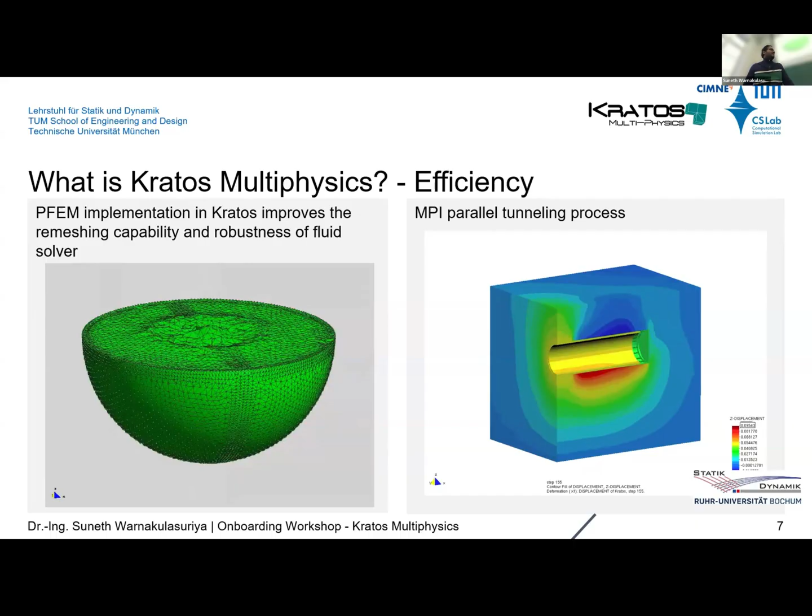When we go through, you can just ask, no problems at all. So this is about the efficiency.

Next comes the particle methods, because Kratos does not only allow FEM-based solvers, but it also allows particle methods. So you can see in the top left, in DEM, discrete element method, you have these multi-spheres, and then you have this backhoe kind of action, and then you have the material point method application here.

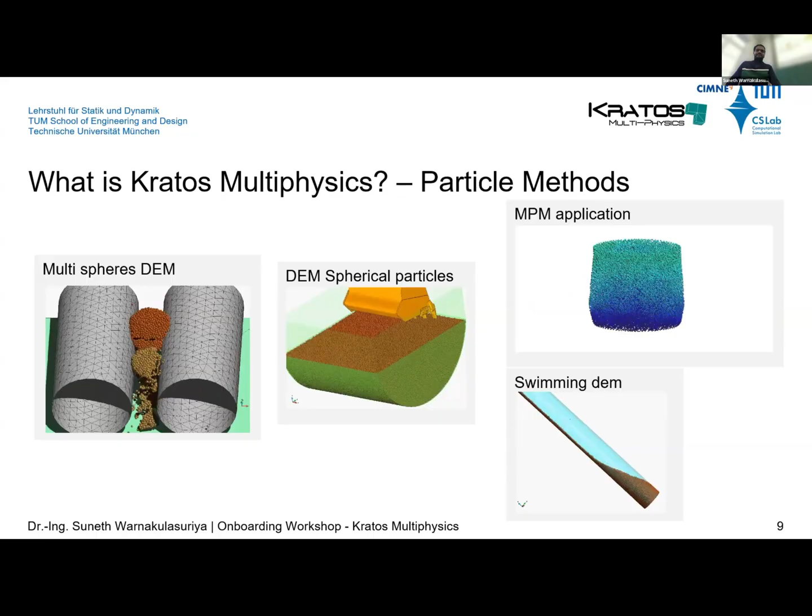Another thing which we will be looking at today is optimization. There are three types of optimization. One is sizing, the other one is shape, the third one is topology. Sizing is the easiest one compared to the other two. Shape is next hardest. Topology is the hardest, basically, because in sizing you don't change the shape. In shape optimization you can change the sizing.

What I mean by sizing is basically cross-sectional area of a beam or shell thickness. You can change them without changing the shape to optimize, for example, for weight, so that you can reduce the weight of a component and still have the same strain energy. And shape optimization means you allow the beam coordinates to move so that the beam also changes along with its thickness. That's shape. This is one of the advanced examples.

And topology means you don't even know how many beams are there. So you can introduce new beams or remove beams or elements or everything. So that's the hardest one. You can see it in the top right. Okay, the animation is not playing. Yeah. So you see after some time, it removes elements and then builds this bridge structure which has some other boundary conditions.

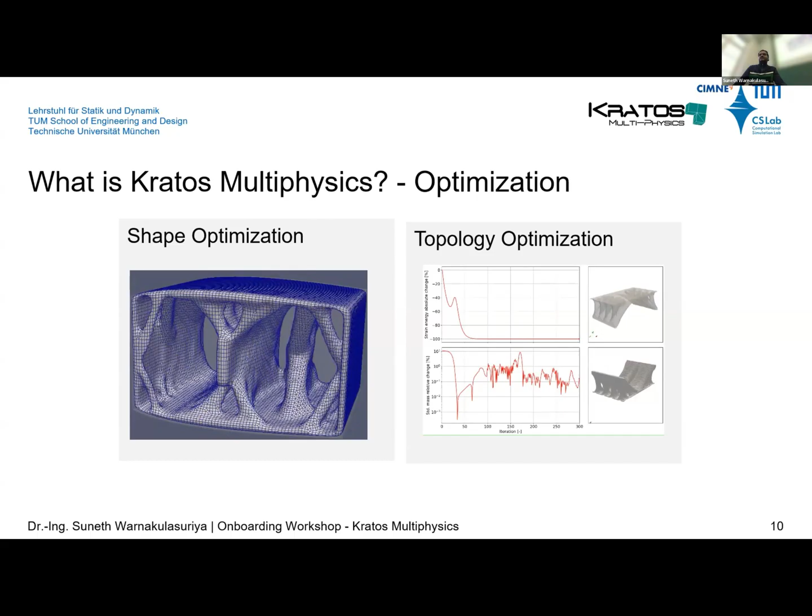Then there's topology plus shape optimization. It's a different field of study and a research area also. So this is about optimization. We will be looking at one of the Kratos examples in the hands-on session in this regard.

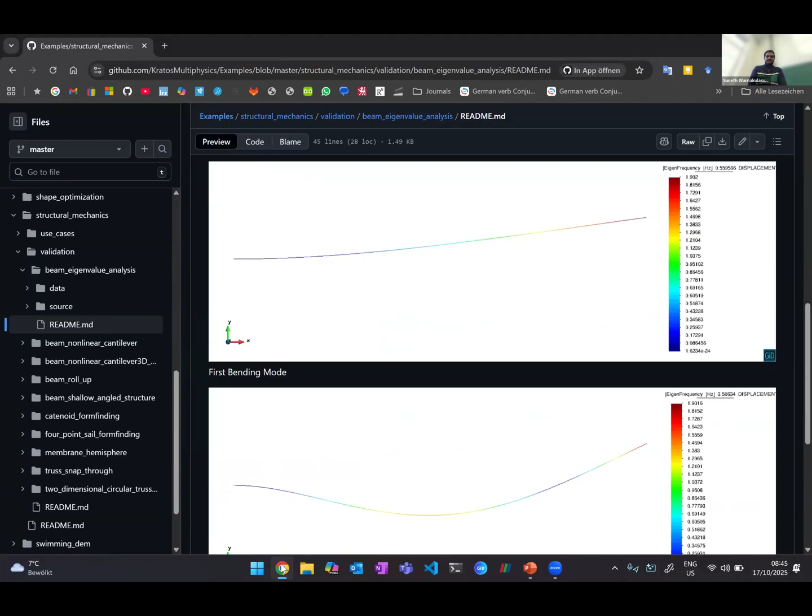So now, I just explained this. Okay, I did not go to this link actually, so I will just go there and show it also - the documentation of Kratos.

So this is, I would say, the user level documentation, which we kind of decouple from the Doxygen. That means this documentation usually has the element formulations, or whatever the formulations, but not the exact details of how it is implemented.

Because we want to decouple this exact implementation detail from the actual physics, since physics usually doesn't change - if you look at reality, it doesn't change basically how it reacts. But how we implement it might change due to our experiences, due to new features in programming and everything. So we decouple them.

So that's why we have the Doxygen, which is commented on the code itself to follow the code. This gives you a rough idea about how everything works together and what physics are being used. This is a little bit longer lasting than the Doxygen.

After this course, if you're still interested, there's a crash course also. You can follow some steps, which I'm not using today since I'm using a separate one due to time constraints. This needs a little bit more time actually to do everything, but you can just go through it. It explains step by step, which I will also cover in a different manner.

And that's how to get Kratos also, for Linux and Windows. And macOS support is coming pretty soon at the moment.

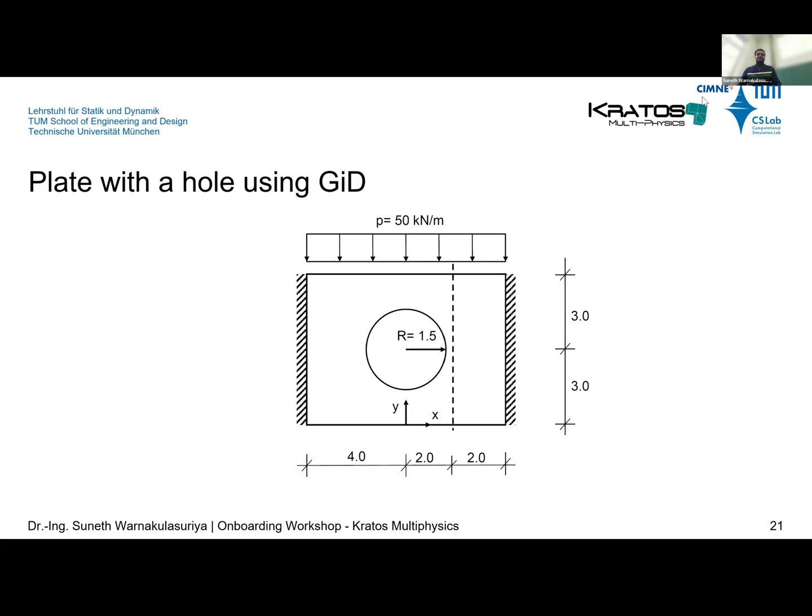Now let's go to GiD. You have some steps in the slides also if you download them. So open GiD first. The version doesn't matter; I'm not sure which version you have downloaded. For this example, it doesn't matter. But the interface might be a little bit different if you have a newer version than mine, because I did not update my GiD recently.

First thing you need to do is Problem type, Internet retrieve. If you don't see Kratos in here, and I don't think you do, right? In Data, Problem type. No? Then go to Internet retrieve. In here, find Kratos and retrieve the module. It's in Data, Problem type. Here. Got it?

And then did you find the Kratos? Yeah, then do the retrieve module. I already did it, so I cannot do it again. So it should download some things and fix some things for you. Yeah. Does everyone have this Kratos now? Once you have it, you should have this, right? Maybe for macOS, maybe there's a GiD. I never checked. Let me double check.

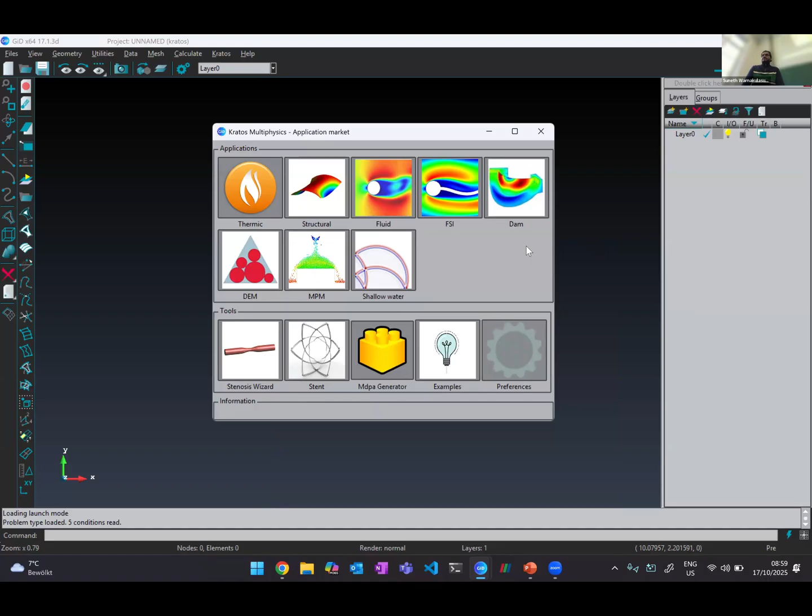Okay. Hi. Morning. So you now go to problem type Kratos. So you will get something similar, but not exactly the same unless you have the same version. Maybe there's something more, something less, depending on your version. For the plate problem, we will be using structural. So you can use structural and 2D, because this is a 2D problem which we will be solving, not a 3D one. Here. Like this.

Now you get this additional side panel, which is to configure your problem. Before configuring, we need to have a geometry first, basically. So how do you create geometries? If you look at this panel, you have here create line, create arc, create NURBS line, and this creates some basic geometries like that. This is how you can create geometries, even the 3D ones, in GiD. How you create these geometries is different in every application. So you will see it when I do the Salome example also.

So since it's a plate, let me go to the plate. We have here 8, let's take meters, and 6 meters here. So everything in meters, even though it's a big plate then, who cares? So you can create here basically a rectangle by clicking on this. All of these steps are in the slides also, but you can just follow me on the screen if it's easier. And if I'm going faster, just let me know.

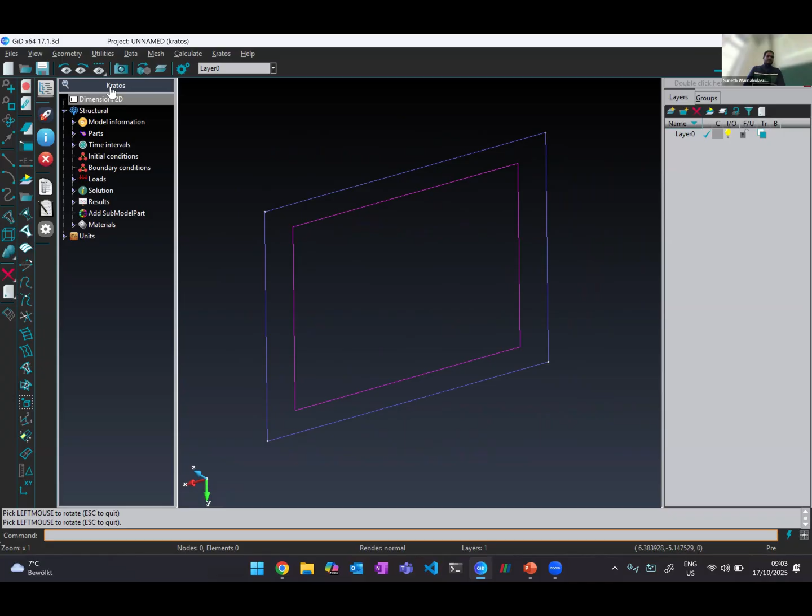And then I think you can rotate or translate by shift and right click like this in GID, and then rotation is left click. But you need to press the shift, like this. You can always get back to the normal thing, like view XY original plane in here. So click on here, XY plane. So you get to the normal.

In GID, the points are in white. Lines are, I don't know, this color is blue or what? I think it's blue. This color. And then the surfaces are shown in this purple. Purple says it's a surface. And bright blue, the volumes. But we will not be doing volumes in this one, so we will not see. So that's how you differentiate the lines, points, and surfaces in GID.

But if you want to see the full flat view, you can click on here, render flat. So you see it's just flat, the actual outer appearance. The problem with outer appearance is, if you have a complicated shape, configuring a boundary condition is hard. So that's why we don't use this unless we want to find some problems in the mesh and all those things. So you can change it, render smooth, and then again back to render normal. Usually we use render normal. Yeah.

Now we want to create a circle in the middle point. So you can go here again, and here the circle.

It doesn't pop the, yeah, circle. And here enter the center for the circle. Here it says. So you can say here 0, 0 because my center is that. And what is the normal direction of the circle? So for this case, it's positive, is it? Like this. So then, yeah, it's there. So you can click on it.

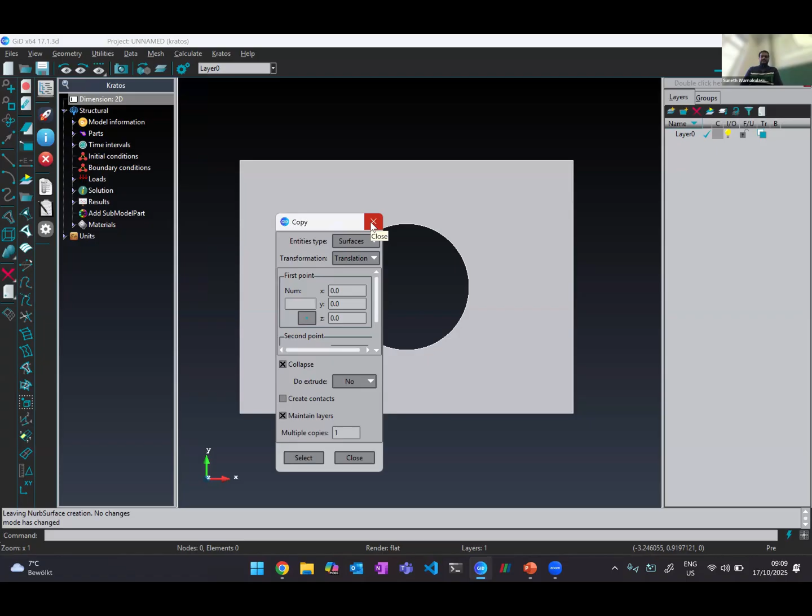If you want to have a 3D one of it, basically, it's not so intuitive. What you can do is utilities, copy. I mean, not for this one, I'm just showing it, because this is a 2D one. You can do here, surfaces, extrude, mirror, everything is there, if you want to get 3D ones from this. For this one, we don't need it because it's 2D. So it's okay. Yes.

Now we need to identify some domains, basically, to set, let's say, boundary conditions. Another small question. So everyone has some background in numerical methods, right? Yeah, so I don't have to explain that much. In this example, we know left and right are fixed, and we have a distributed load at the top, right? So what we need is to have these boundaries separately so that we can apply different things to them in the future.

How do you do that? If you don't have the right panel, you have to click on this. So it pops up the right panel. The layers and groups, the button in here.

Then go to groups, because layers are used to do the advanced modeling, so you can turn off and on some things and then use the visualization within layers with different colors, to do advanced modeling of a little bit complicated components. The groups are used for the simulation purpose, to specify some areas to apply maybe some boundary conditions, or maybe some material properties, whatever you have to apply differently.

Let's say that you have this plate half divided with two materials, then you need to divide first your mesh, the geometry, to represent that, and then you need to have multiple groups. So let's see how the groups are done. Right click on it, new group. Then I will just call it solid because this is a solid plate. You can just give any name.

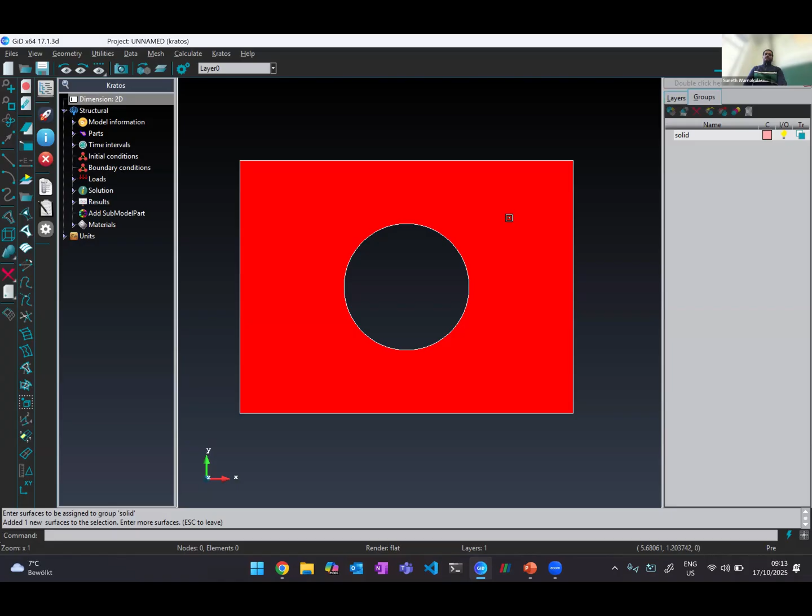So it's selected. If you are in the render view, the lines view, which is not the flat view, then you need to click on the purple lines, which represent surfaces. If you are in the flat view, you can select anywhere in the surface. Now it says added one new surface. You can keep on adding multiple surfaces to this group if you like, or press escape because we only have one surface. It says here assign one figures to group solid.

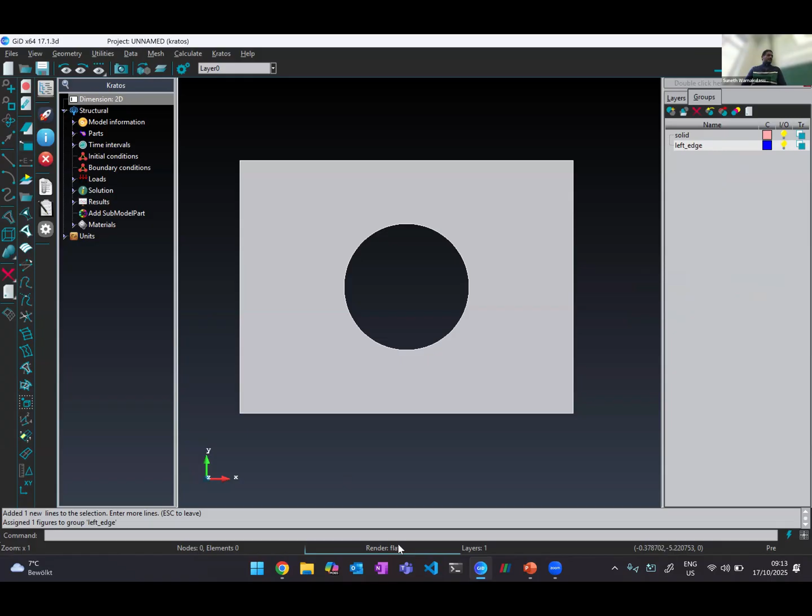Then you need the boundary conditions. Again, a new group. I would say left edge. So you can right click, again assign. Now it's a line, not a surface anymore. You can say line here and click on this line. So added one new lines. Press escape, done. Now I will move to the other mode just to see the other one. Now you need to do the same for the right edge. Assign line, so you can click on this one. That, and then the load.

Like this. So for this example, it's not that crucial to check whether what you have done is correct. But for complicated ones, it might be. Because you may never know that you have clicked on the correct line, because you might have visualization problems when you're clicking, and you might have clicked the wrong one. Because if you run with the wrong boundary condition, you will still get some result, and you will be scratching your head why it is like that. So it's better to always check your steps.

How do you check that? You can use this light bulb to turn on and off. That's what I usually do. So when I turn off the solid, you see the surface goes away. Okay, that's the only surface then, which I selected for the solid group. You can turn on and off. So you turn off that. Then you turn off the left edge, you see the left edge goes away. So I have selected correctly. I have not missed anything. That's what I'm checking now.

And the right edge, correct. Load, correct. I don't care about others. In this problem, we don't have any boundary conditions for them. So that's how you check. And the other thing you can check is you can right click and list group entities and then see how many surfaces are there also. It shows how many surfaces. Only one surface. And the left edge, also the same. You can double check that.

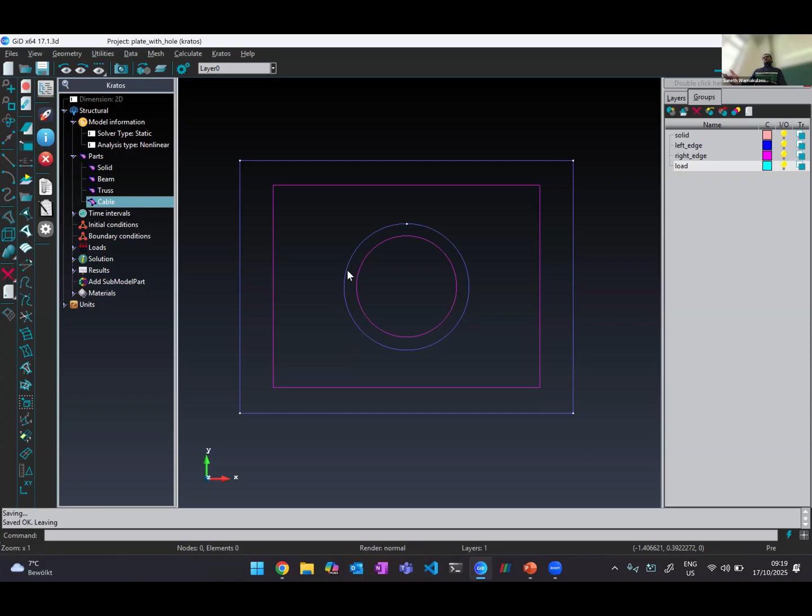We are always working with notepads to create the JSON files, which I will show you later. That's how we are working, not with clicking and stuff. We only click to create these geometries in our practical day-to-day life, because otherwise it's hard. But for creating these files, we don't use interfaces usually.

Yeah. So this is a solid one. So you can double click like this to create a new solid. So small displacement is fine for us. A linear elastic plane strain is fine for us. So these are the strain types and these are the element types. Again, not the whole spectrum of elements in Kratos. Kratos has a lot more elements than this, but only the interface supports this. The GID only supports this.

And then these are the properties. You can keep them as they are. It's not a problem. And then you need to select which group. So we said solid. So we put solid and press OK. And again save. Every step, just save. It's a good practice in GID.

We don't have any beams or trusses, but you can have multiple types of elements here connected to each other. Like in a steel bridge, you can model it with beams and the bottom with shells. All of these things are possible, but to keep it simple, I didn't plan on doing that in this onboarding workshop.

Next, the time intervals are for transient simulations. For static cases, we don't care what the time interval is. We just use one time step. Initial conditions are again important for transient simulations. For static ones, we don't care. It's good to have a close enough solution, then it will be faster if your problem is fully nonlinear. For this super simple static case, we don't care about it.

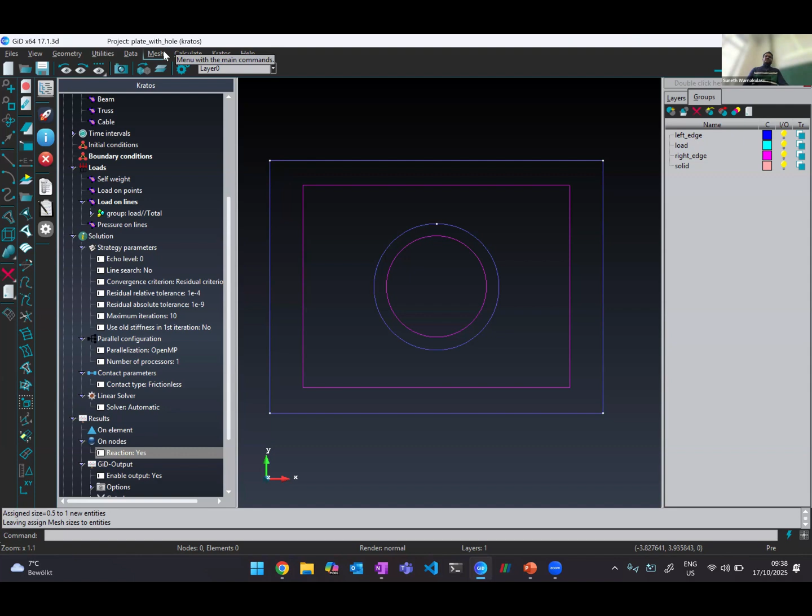Once you have the meshing sizing done, you want to check whether you've done it correctly. Go to Mesh, Draw, Sizes, and All Types. So you see the sizes you've given: mesh size 0.5 for this geometry, 0.3 for this circle, 0.2 for the lines.

Save, don't forget that. You can also check your mesh quality once you've generated the mesh, I'll show you how. First, let's generate. I don't know how much you know about boundary layers, but for fluid guys the boundary layer is important because that's where all the velocity changes happen, so you can create boundary layer meshes too if you like.

You also have the element type here. You can specify triangle or quadrilateral. Since we use unstructured meshing, everything will be triangle, so there's no point specifying quadrilateral. There are mesh criterions too, those are advanced stuff for how you do the meshing.

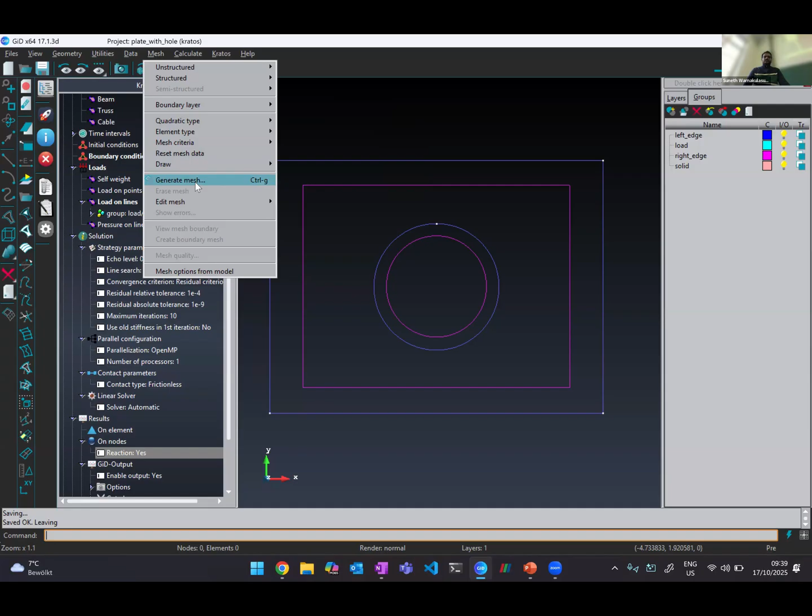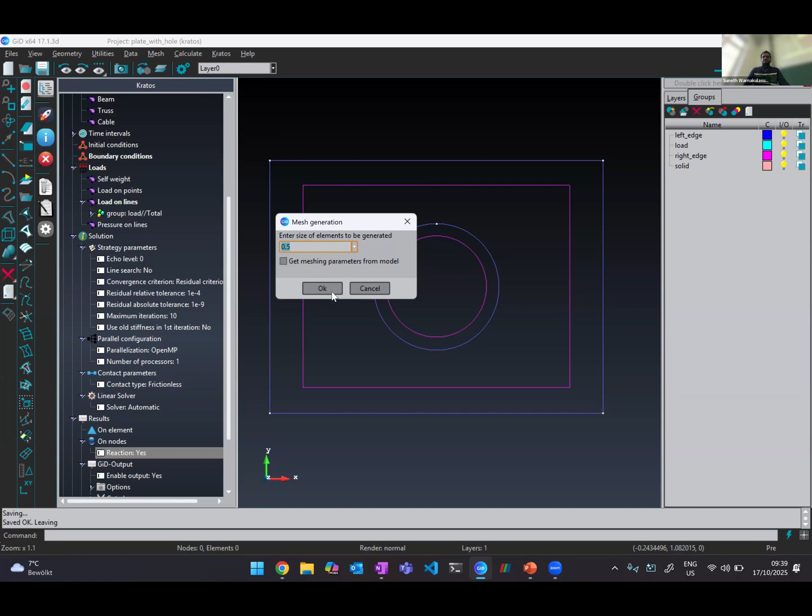Once you've selected and done the sizing correctly, click generate mesh. This is the general size the meshing algorithm will use if you haven't specified any size for some domains. It's optional - if you've specified every size correctly, this is only a fallback. You can say 0.5, and it will generate the mesh.

So it says linear elements, meaning the edge elements, is 100, and you have triangle elements, which are the surface elements, 784, with 480 nodes. There's also memory consumption shown - it's a super simple mesh so it's fine. You can say view mesh to see it. It's not the best mesh, but we can work with that. Now save.

Now, how do you check the mesh quality? That's also important when you come to numerics, because if you have a bad mesh you might get an answer that doesn't reflect true reality. It's always assumptions, because when we do numerics we make a lot of assumptions, so you need to always check your assumptions.

So you go to Mesh and then Check Mesh Quality. For linear elements, you can check different quality criteria - element volume is the only one available for linear elements. You see the volume is 0.2 everywhere, so it's nice, the same size every element, even though it's shown as a cumulative graph. You can switch between cumulative or normal view. Everything is 0.2, so it's fine.

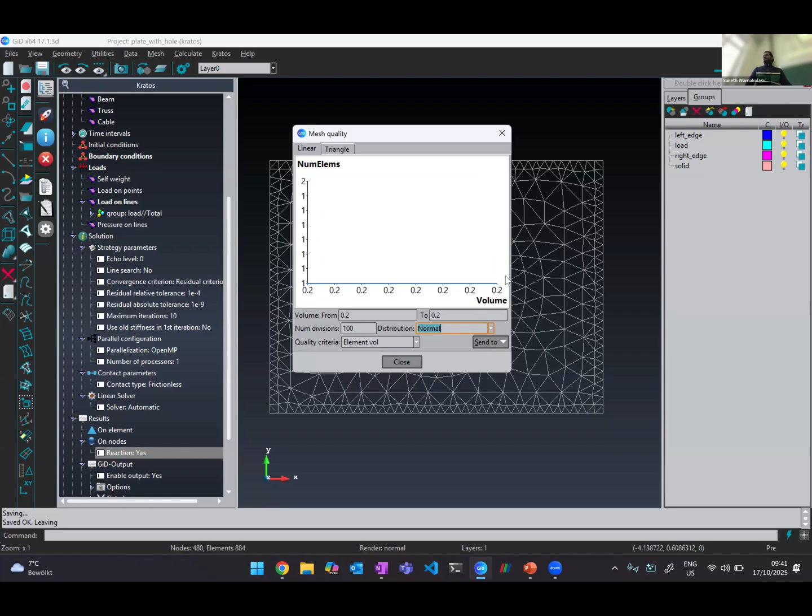Then let's look at triangles. Triangles aren't the same case as I told you, they can't have the same size measures. You see here the volume is 0.19, but the problem with triangles is I don't like using volume that much. I usually use either the Jacobian, the shape quality, or the minimum or maximum angle, because it makes more sense.

What minimum angle means is, in a triangle, what is the minimum angle you get in every element. If you have a perfect triangle where every angle is 60 degrees, that's perfect and your mesh will not have any troubles at all. But in reality you will never have that. So you see here 28.4 is the minimum angle, and the maximum is 59.3 - almost 60.

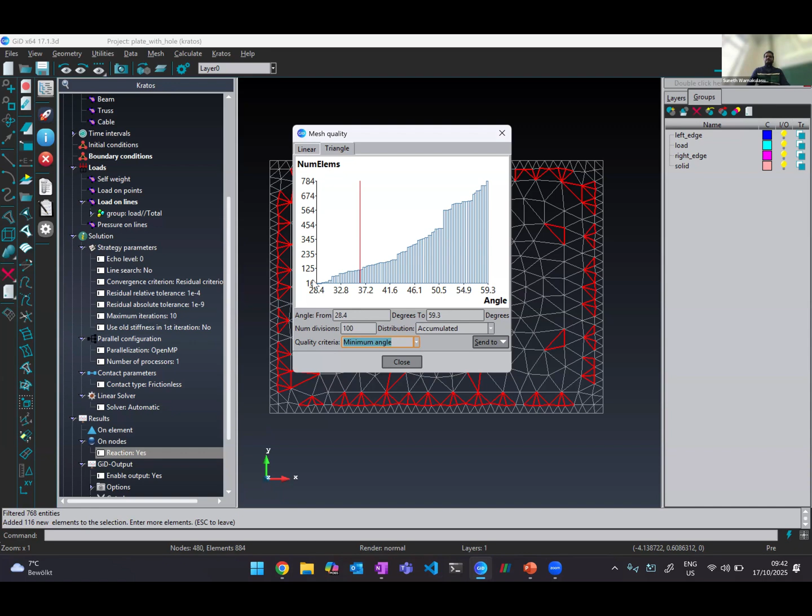So there are some elements at around 30 degrees, but that's not a problem because it's not skewed. If you want to see problematic elements, like say 1 degree, that might be a problem. You can double click on it and it will show all the elements which have a value below that threshold - these are the elements for mesh quality control.

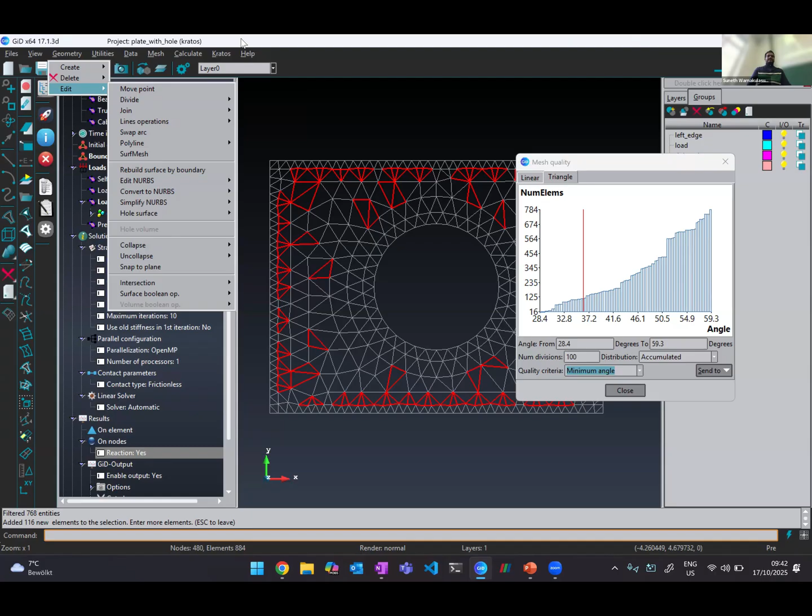Then you can edit those elements manually using Geometry Edit, and move those nodes or break them into multiple elements. That's a bit advanced, but you can try it if you like. Divide and join options are there for this, but it's a bit advanced. That's how you can do it. If you want to keep these elements for future reference, you can send them to a new layer.

Like this, that's why the new layers are used. You can say new layer, and if you go to layers, you have here the layer which has the elements you selected. Now you can work on them separately. Layers are used for this purpose, just to work on some sub parts, turning off the others. It's not used by the simulation, only for the geometric modeling and mesh handling.

Like that. Don't forget to save. I am repeating this because it's super important, the saving part with GID. Now we have created the mesh.

You can try run or calculate. I don't think it will run for you. Let's try it, in my case it will run. If you say calculate, okay.

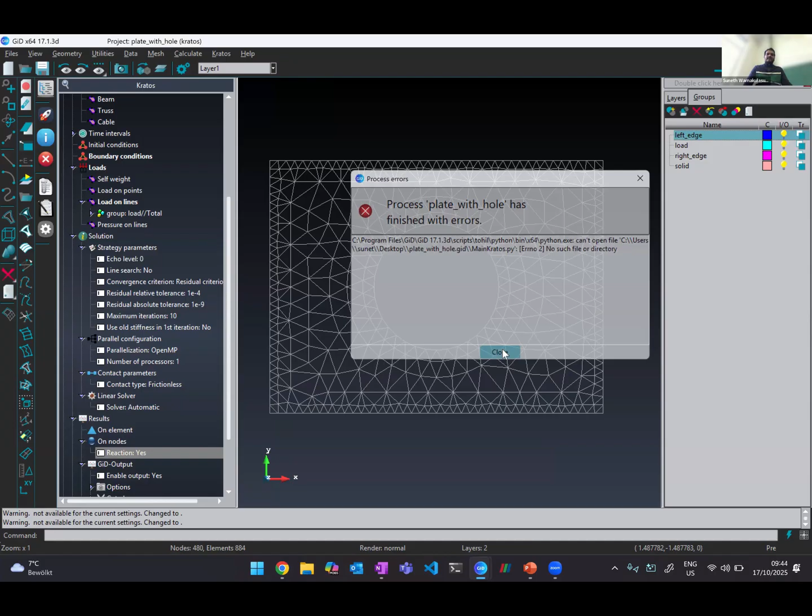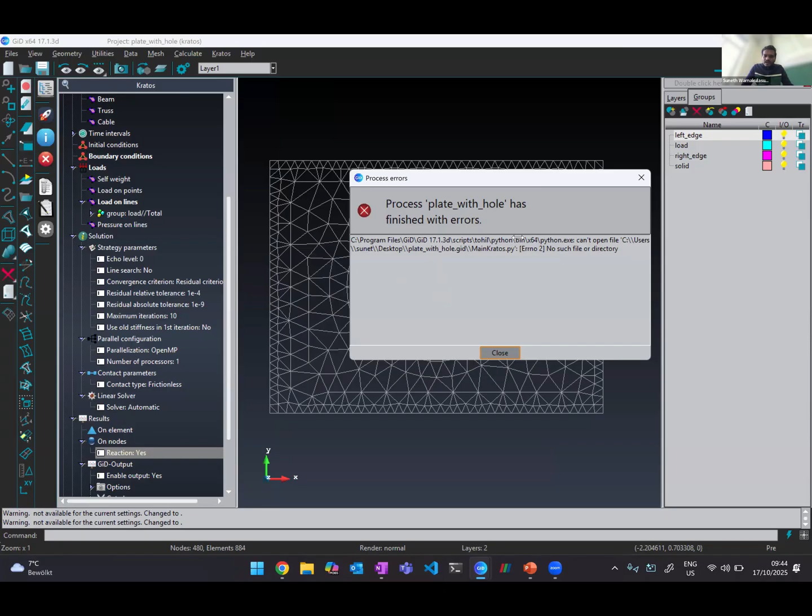Okay, I didn't save it. Okay wait, Kratos mesh, yeah. What is this? Okay, it says my file directory is wrong. Let me double check.

The best way, which I would always say, is write calculation files, no run. Do that, it's easier, because we anyway need Python separately to do the rest of the course. I usually don't run it in GID for different reasons. So you can say write calculation files, no run. Oh yeah, that's a problem in GID.

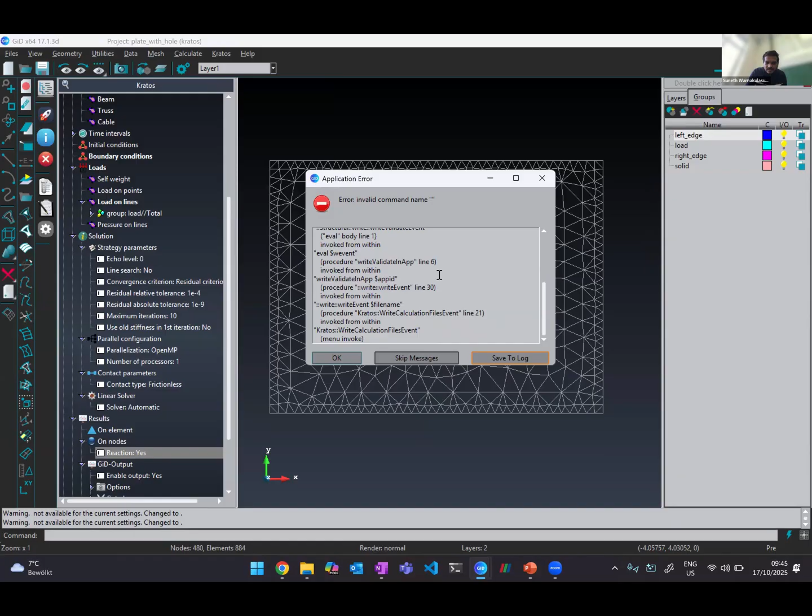Were you able to do this? Yeah, my one is broken, I think. That's why I told you GID is a little bit delicate. My one is a little bit broken. It was working yesterday night.

Yeah, give me a second, I will just do everything new. Because sometimes when you have in-between errors, GID kind of breaks and no one knows why. So I will just do it easy, super fast. This is settled, right? Yeah.

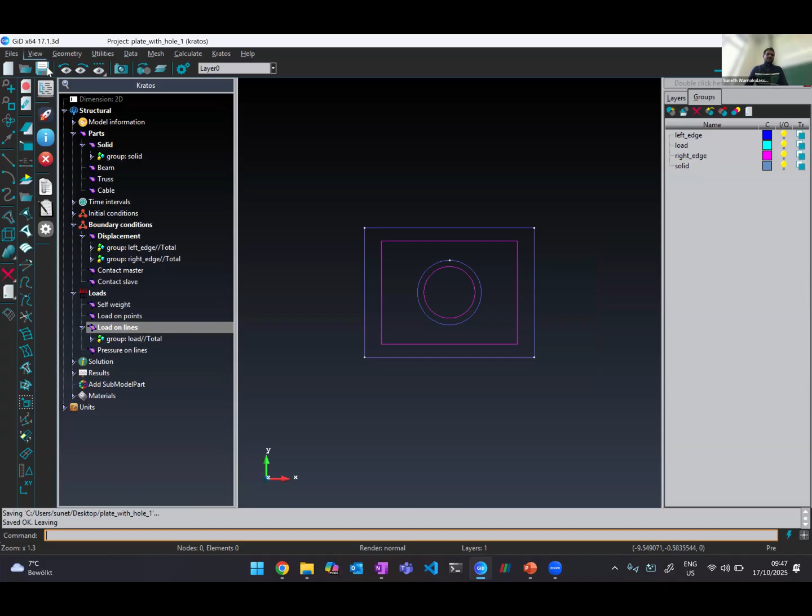Yeah, I didn't give any sizing, so it's like this. Okay, it works now, that's what I told you. It works now, so when you have some intermediate errors in GID, this can happen.

That's why we always save and reload, so that you can reload at an earlier point. Another point is the undo is a little bit not reliable, even though there's somewhere an undo, don't rely on it. Always save different steps in different file names and then use manual undo.

Yeah, now it worked for me also, and I think now I can call calculate also. It works. Earlier I had some intermediate errors, so that's why it was not working. So you can say you're finished, but I don't think you can do it. Can you try it? I think you need to install Python. Does it work for you, the calculate? No, right? Yeah, so let's go to that now.

Fix that. So open command prompt like this, because this is anyway required for the rest of the course also. First check your Python version, you can say python --version. So does anyone have something above 3.12 Python version?

That might be a problem. No, right? And below 3.8 is also not there, right? Because Kratos is only available for Python 3.8 to 3.12 at the moment.

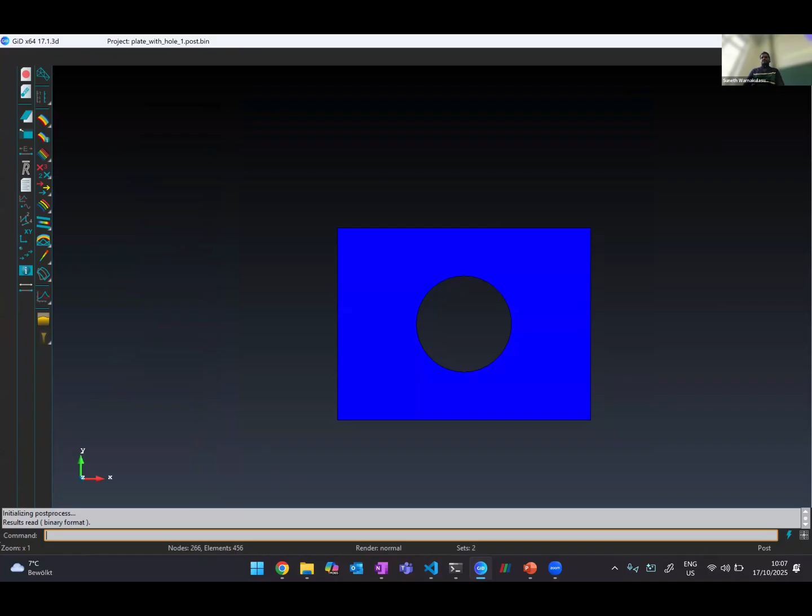Now let's look at the result. In GID, if you want to look at the result, you can click on this. Since we ran the simulation, it should be fine. Here it says pre and post processing, click on this, let's hope it works. Yeah it works, so its interface fully changes.

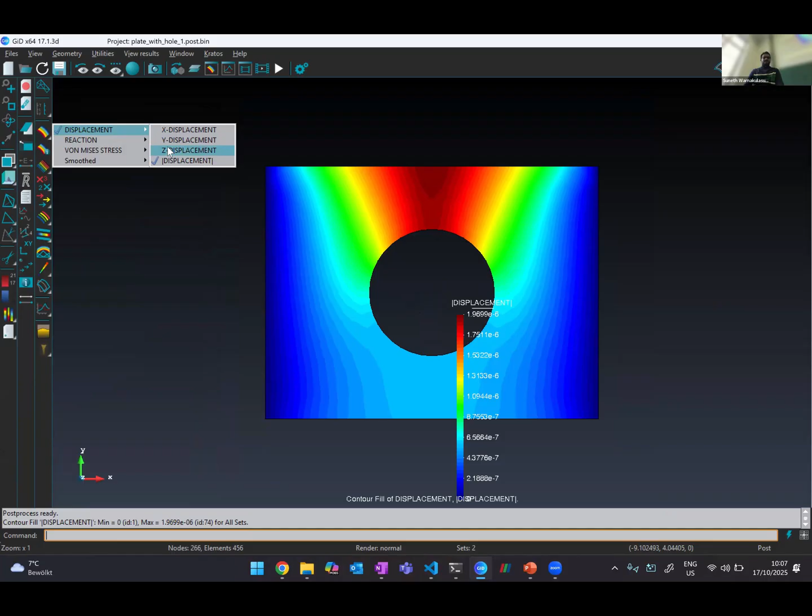So you can just zoom in like this, and then you can see visualize stuff. So in the displacements, you can see the displacements like this, or if you want to see the components of it, you can see X, Y, Z, however you want. And if you want to see von Mises stresses, this is the one. Those are Gauss point values, so that's why it's discrete per element.

And if you want to see reactions, you see the reactions are higher in these 2 edges, that makes sense. The rest should be almost 0. Yeah, that's how you can visualize. There are some additional filters and mechanisms, so you can just check them out.

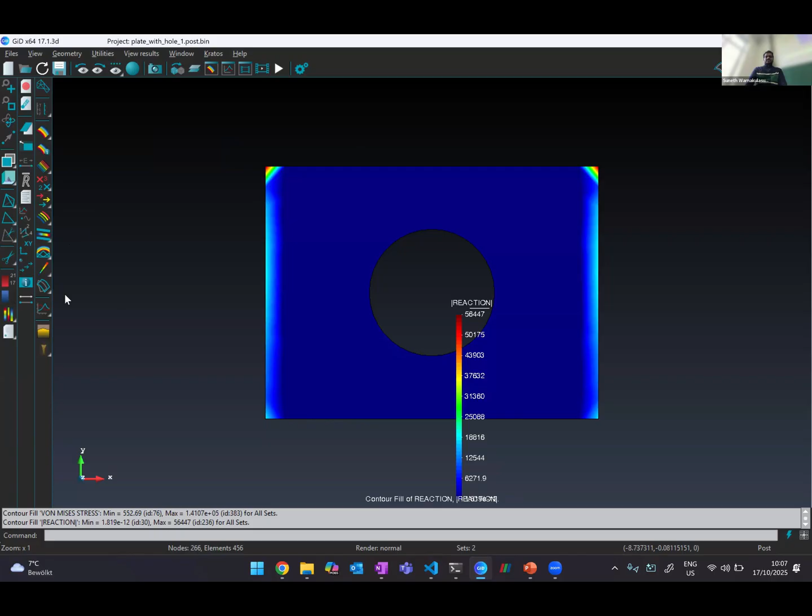If you want to see the deformation, you can go here, deformation, and then click on displacement. So you see how the structure deformed with your load. And there's this multiplication factor for sure, because actually it doesn't deform that much. This is artificial, I mean magnified deformation.

Yeah. With this, I think I'm concluding the GID part. I don't think I missed anything. Let me double check. And then we can take a break of 15 minutes, I think, right? I don't know when the break is, to be honest. It's 10:07. I'm a little bit late, but it's fine. We can take a break of 15 minutes. Then if you have any questions you can ask me anything regarding up to now.

Yes. Hi. I'm not sure, I'm not able to view the... Okay, first of all, we need to open the Python file. You need to go to the software, onboarding, and then go to script, and then click Python. Okay, I will install it. No, I think you don't have the extensions installed, which I will show you now. I can install it for you.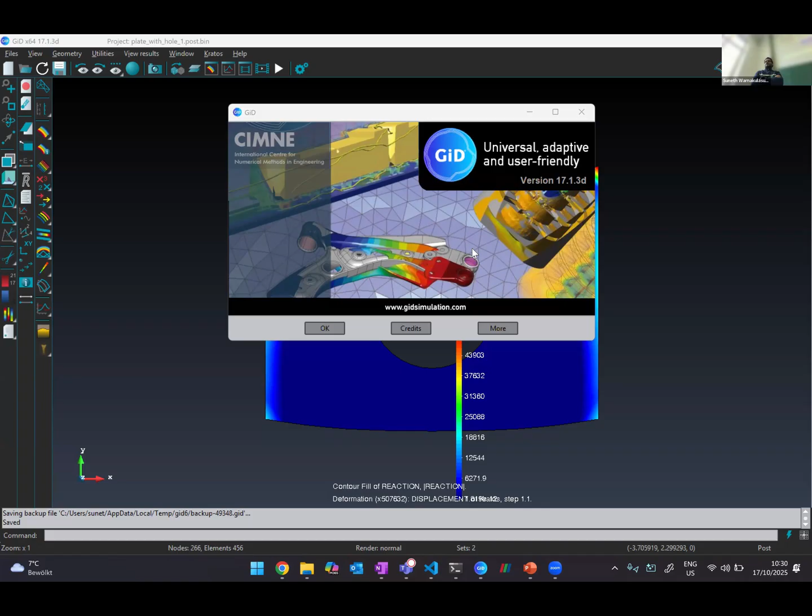Okay, since everyone is back, I think we can start. So now the GID session is over. Now let's look at the fully open source pipeline version, which is Salome. I hope everyone has Salome installed. So I will close GID now. Okay, I will save everything and close. I hope this is still being recorded. Yeah.

Was this mesh done by GID or also from the Kratos software? No, this mesh is purely done by GID. Kratos has its own meshers, as you saw in some cases. We are not going to touch that at the moment, but I will explain some of the structure in the afternoon session because the afternoon session is fully in-depth Kratos.

The morning session I kept just for clicking and running, so that you are not getting overwhelmed in the morning, so that you're not running away basically. The afternoon is fully in-depth Kratos, fully hands-on without clicking and running, basically.

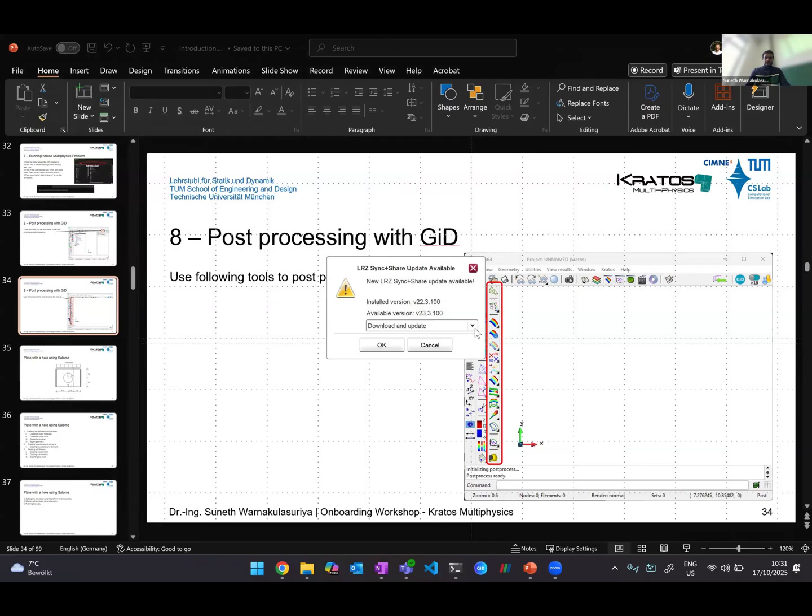Okay, so we can close this for a second. I don't need this. It's the same problem, just to see the differences, hardships, everything basically, because when you get something easier, you have to pay some price. It's always like that.

Now let's look at Salome. So you have some instructions in the slides. I'm not showing them because I'm going to do it live with you, so you can follow me. But for the future, you can refer to them if you forget some steps. That's why I put them in the slides with screenshots, how to select and everything, but I will do it with you now.

First things first, everyone has Salome installed, right? Let's open Salome then. I have 9.14, but I checked yesterday night, there's 9.15. I don't think it should be a problem, 9.14 or 9.15. So this is Salome. Okay, give me a second.

I think I can magnify these things because Salome in Windows has too small icons for presentations. Let me try to size it. How do you change the text size? I will try, I don't know whether it will work. Let's see whether it helps. It doesn't help. I don't know how to zoom. Does anyone know in Windows how to zoom? Display settings. The magnifier. That will be hard, then the navigation is a little bit hard. Display settings, there is a scale. Let me try. Brightness. I don't see it. Here, scale.

Is it better than the white one or the dark one, or same? Yeah. Okay, then let's not waste time on these colors. Yeah, when you go to Shaper, you get a lot of options, even though they are super small. Sorry about that. I don't know how it looks like in your computers. My computer is like this. Yeah, and Linux also the same basically.

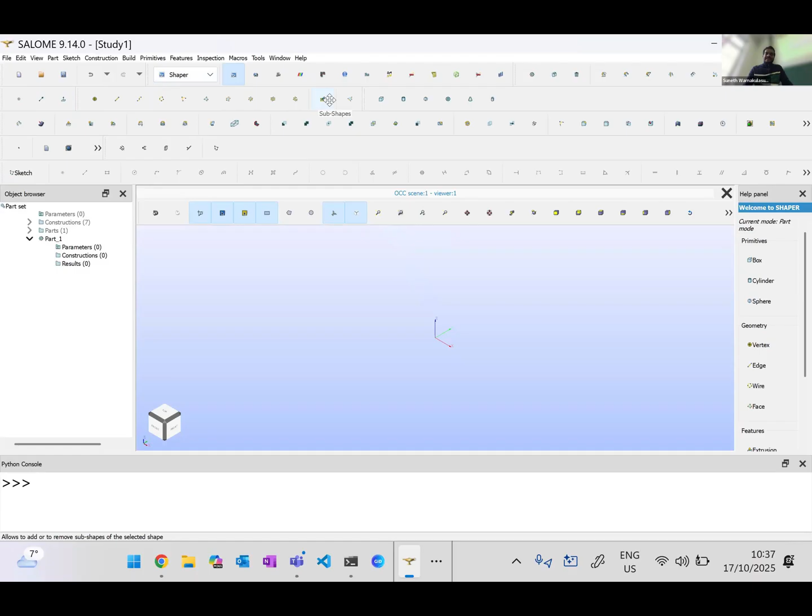Okay, I get a chat. Okay. I am not sure how to do that. Yeah. Yeah, if you have any suggestions, just ping me actually, so then I can change it, because I don't know how to change the icon size in Salome. I tried it, but didn't work.

Sorry about that. Yeah. So in the Shaper, first thing is, so you have here this object browser in Salome, which is kind of like the parametric modeler. Salome can be used to do parametric modeling. Even the mesh can be parametric. One nice thing about Salome is, if you want to do advanced parametric studies, whatever you do in Salome can be recorded as a Python script, and then you can run this Python script multiple times with different parameters.

That's the best thing in Salome. Because backend, it generates also Python script, basically. We don't see it, but if you look at the source code, there's a lot of Python scripting in Salome also. Yeah, so this is the object browser. So it has a lot of things. First thing is we need to create a sketch. That's how we started in GID. We created a 2D sketch, and then afterwards only we did the stuff.

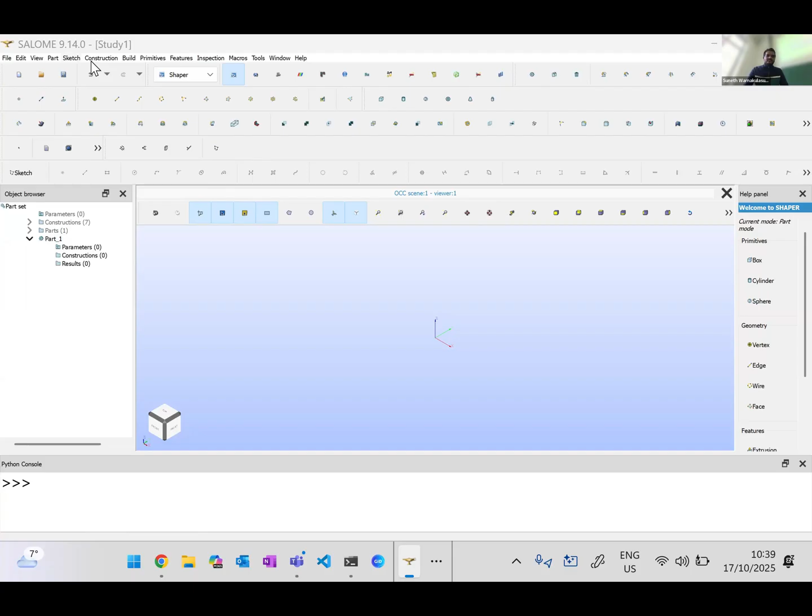So how do you create a sketch? There should be a button, even I can see it. Or you can go to sketch menu, because there's a button for sketch. But if you can't find it, go to the menu. Sketch. So it's visible there. So that's for sure a shortcut. I cannot see it now with this zoomed version, because all my usual positions of the icons are now different because of the sizing. Zooming. Yeah. Create a sketch. In the sketch, they ask for a plane.

Since this is an initial sketch, they will only show you 3 planes. But when you create more complicated geometries, you can use the surface of another component as a sketch plane also, like that. So initial one, they will only show you these 3. You can create custom planes also if you like in here. Another point in here is selecting a plane is a little bit important if you want to do 2D or 3D. Let's assume that you want to do a shell analysis in Kratos.

In that case, as I told you, shell elements are always 3D. But if you do a shell which is just on a single plane, that means you just need XY, right? Basically. But the problem with Salome is if you do on XY plane only, and all the components are only in XY plane, not even extruded to 3D, when you generate the geometry file, Salome interprets them as 2D, then writes them as 2D geometries everywhere. Then when you read it in Kratos, shells are 3D. Kratos says, hey, you have given me 2D geometries. I cannot work with that.

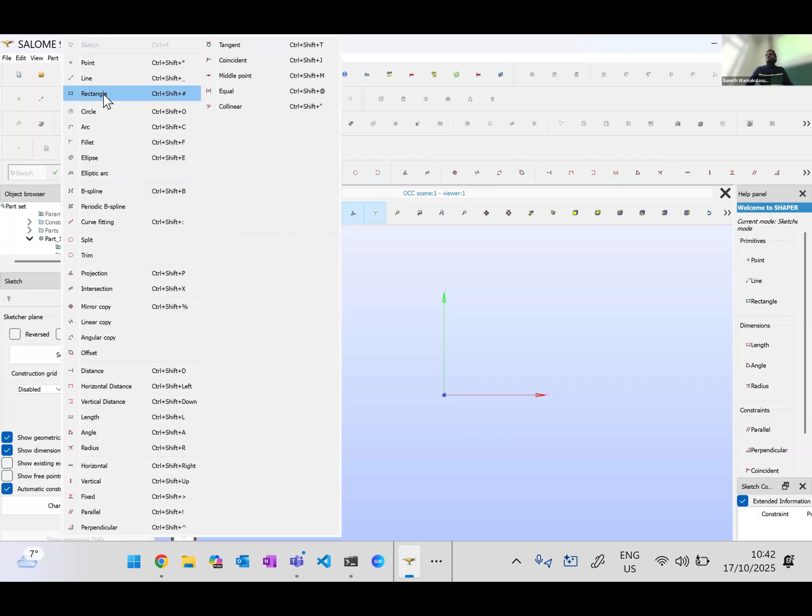For the descriptiveness, I will use the menu always, not the shortcut buttons, so that you don't have to struggle with the icons. So let's create a rectangle, because that's our first thing. Now you get two options in here. You can either give corners or center point and a corner. For different geometries, they have a lot of other options also. So I like this one. I select this. Then you can just click and click. Random, no worries.

You see here, some relationships are already there. If you zoom in here, you see a perpendicular sign, because Salome is parametric and it can have relationships with geometry. So here it says this line is perpendicular to this line. That's why this symbol is there. If you click on it you can delete it also, then it's not perpendicular anymore. You can have an arbitrary shape there.

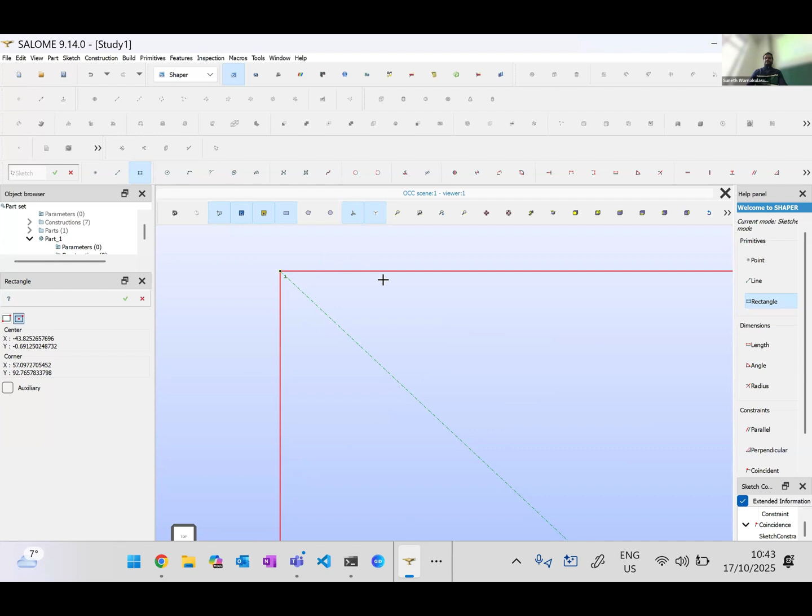Now what we need is to give the sizing. For sizing, you will see here some sizing options. Or you can go to sketch and say either horizontal distance or the length. Click on it and click on a line. It asks for the length. No coordinates information, because this is parametric modeling. You can still do it with coordinates, I will show you later. So this is 8, so it becomes 8.

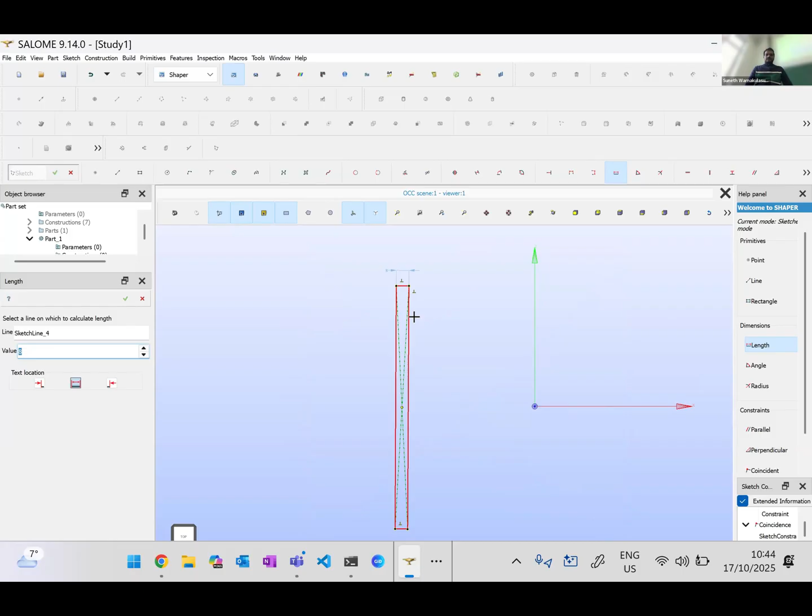Then this is 6, so I'll click and put a 6 there. You see, it's kind of rotated now. That's because the constraints are not enough to fully define your geometry. It's underdefined. You need more constraints. Another constraint you can put: go to sketch, say vertical, and select one of these lines. Or horizontal to the other one, because it's perpendicular.

If you over constrain, it will throw a warning saying it's over constrained. You can try. If I put this one vertical and then try this one vertical, it's over constrained. It didn't apply. It throws a warning basically, not an error, if you over constrain your system.

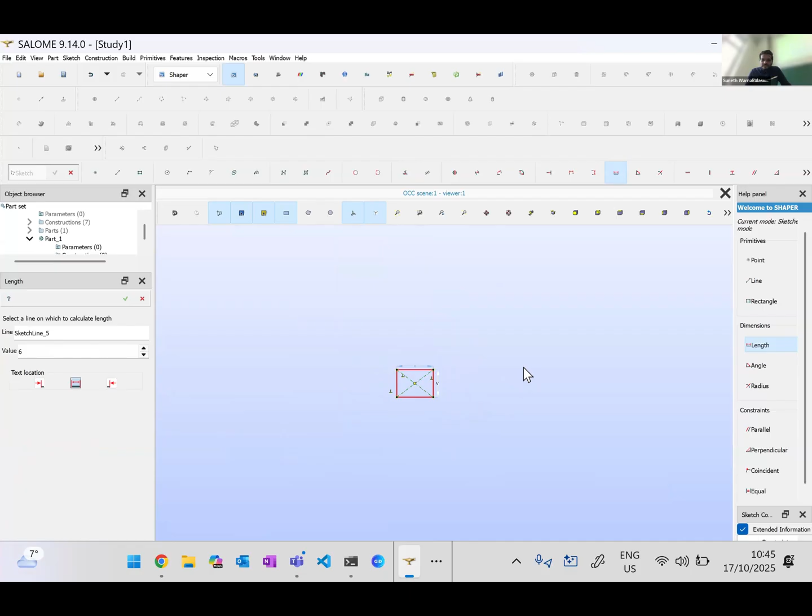Now still a problem. This can still be moved everywhere, that's why it's still not constrained. You can move it anywhere, but you cannot rotate or size it anymore. To make it fully constrained, you can say this midpoint coincides with the origin. How do you do that? Go to sketch. There should be coincident. Click on it and click on the origin. You see first object, second object. First object is the origin. Second object is the midpoint, or you can do an endpoint also. I'll just do the midpoint.

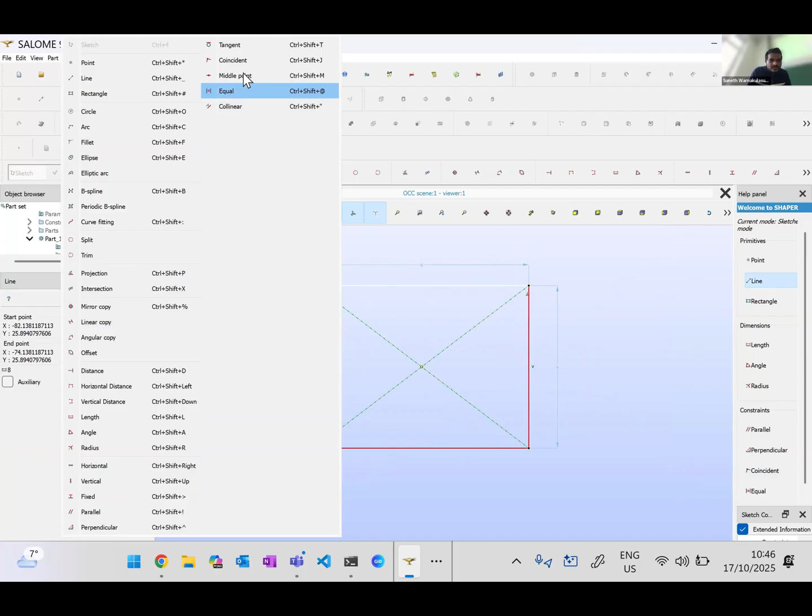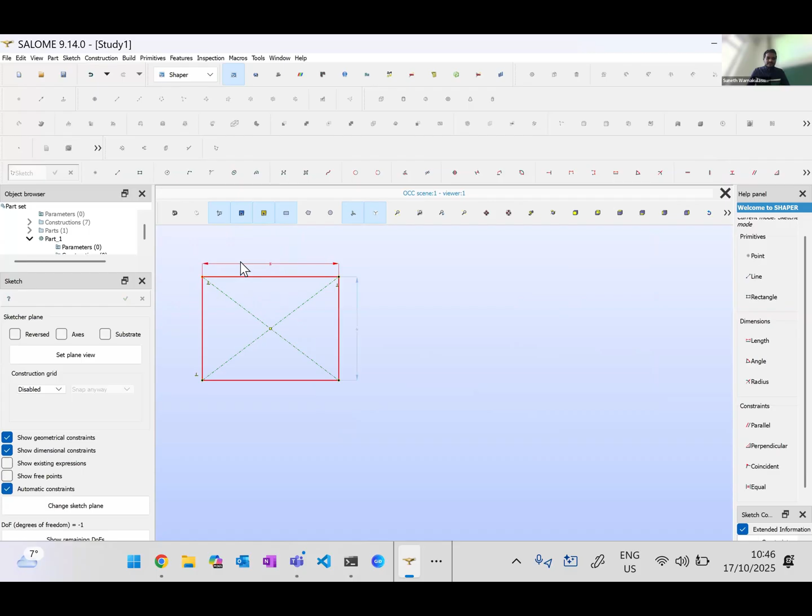It didn't select actually. I think I didn't get it. Coincident. It's the origin now. If it doesn't apply, that means you have some conflicting constraint.

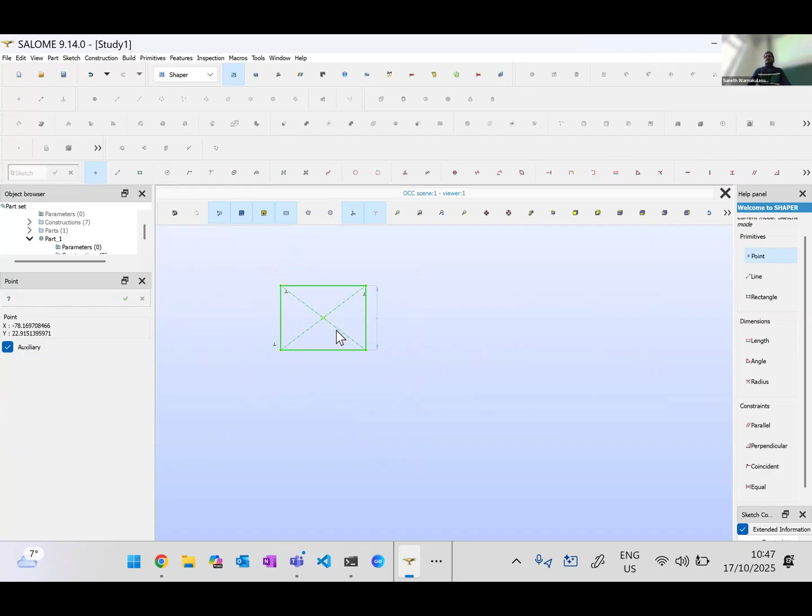You see here, if it's fully green, that means it's fully constrained. It was red because I over constrained it somehow. I think I clicked on some other point and it got over constrained. We can just make a new one. It's easy. Shaper, sketch, and then this is a rectangle.

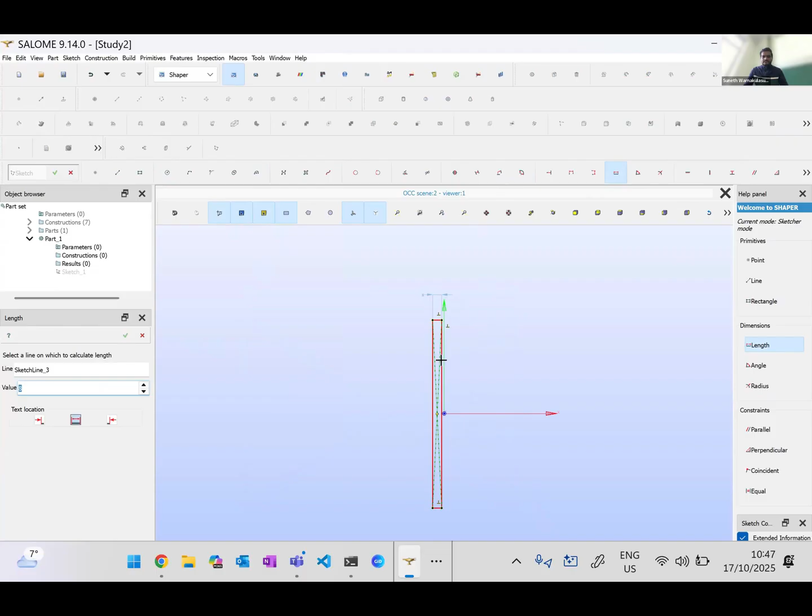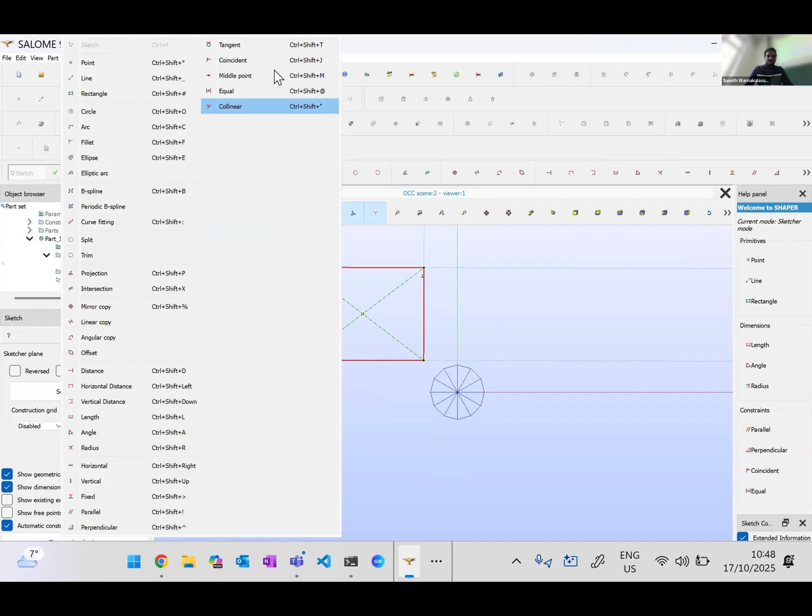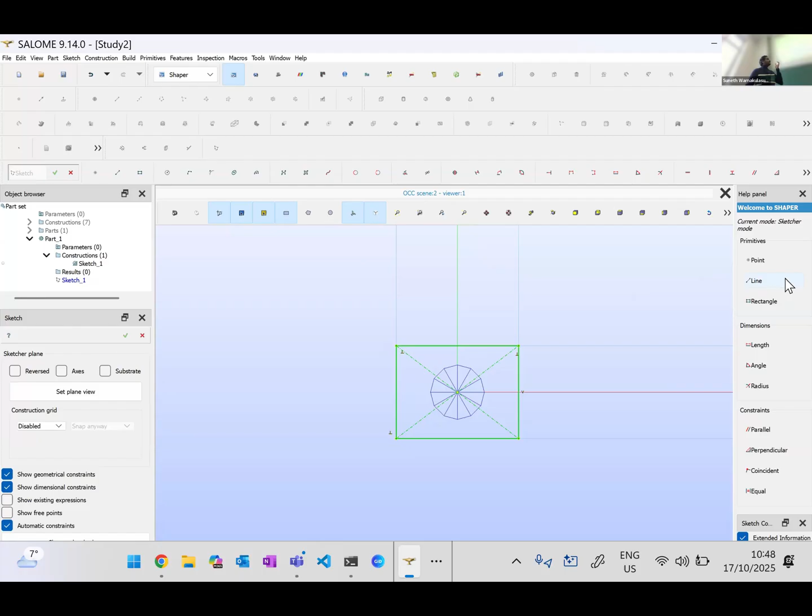Now I need the vertical one. Vertical constraint. Now you see it's fully constrained. Green means you don't have any variables which are not defined for this geometry. Green is fully constrained, so you can't move it anywhere.

Now we need to create a circle. That's the circle, or you can go to sketch and circle. Select the midpoint and draw it like this. First draw with no dimensions. Afterwards, go again to sketch and radius. There should be radius somewhere. Here.

Radius. Click on the circle. And then the radius is basically, I think, 1.5. So it's fully constrained, because we fixed it at the center point and the radius. So the circle is fully defined now.

Okay, let's save. No, we cannot save. You need to go out to save. If you want to save now, click tick and then get out of the sketch by green ticking it. So you go out of the sketch. Now you are not in the sketch mode. You cannot change the sketch anymore.

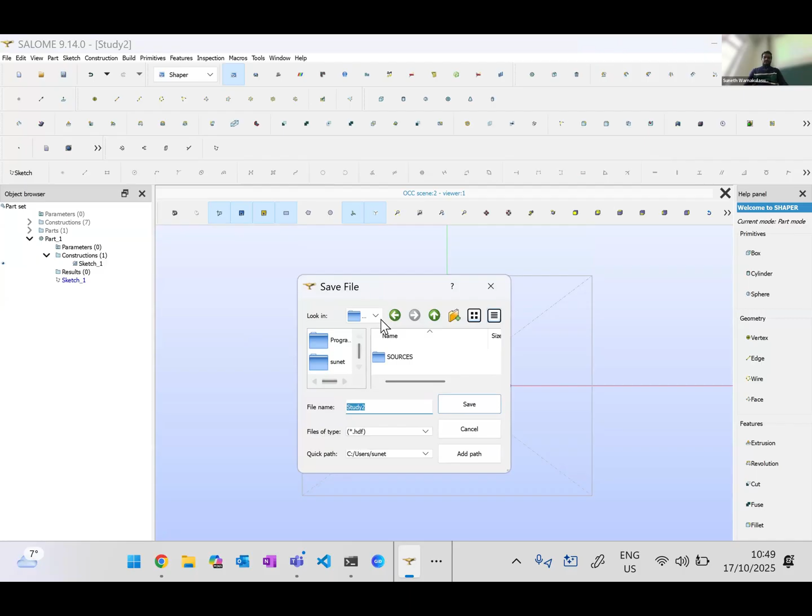Then you can save. I will save it in the, okay, this is super hard. Why doesn't it even show my? Okay, it only shows this folder for some reason. No idea. Okay, save. Yeah, fine. Save. I saved it. Again, you can go back to sketch by right clicking. Okay, it's still saving. That's strange.

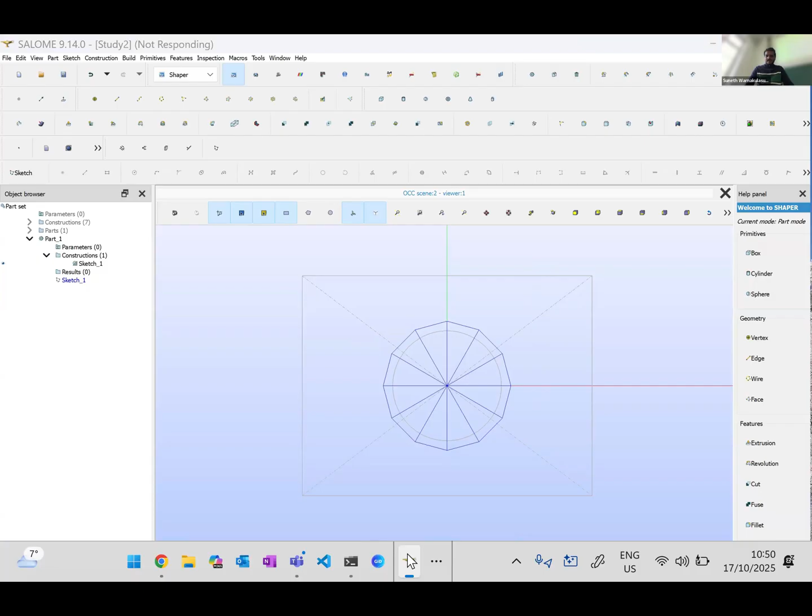Yeah, this is a log file, so I had a lot of redundant solvings. Basically, that's what it was warning about. I think my computer is stuck because of this zooming thing. It cannot respond to zooming. It's stuck. Sorry. It came back to life. Yeah, it came back. Okay, you're back.

So right click, you can go and edit sketch again. That's a nice thing. So you can always go back and change some things. So now you are in the sketch mode again. Anyways, we don't have to do anything in here because that's the geometry we want. Now we want to create basically the shells.

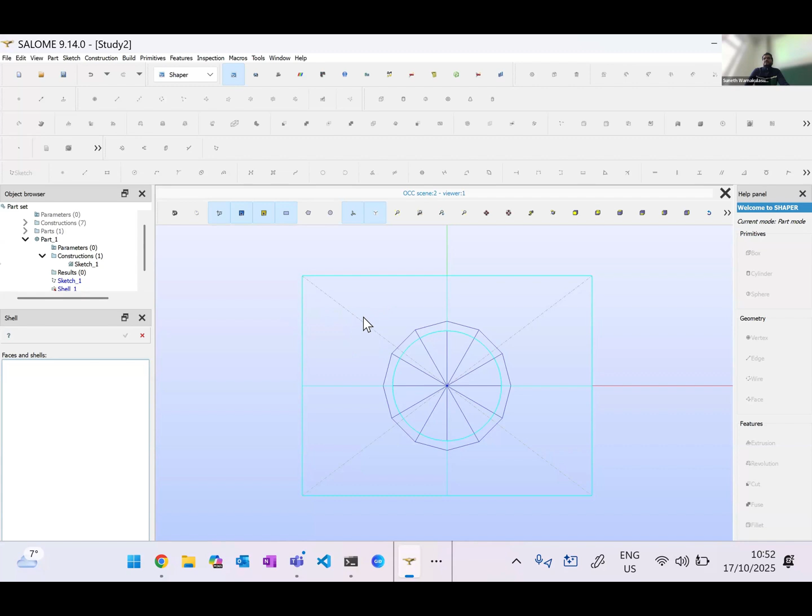Okay, they should be in, yeah, here. So you go out of the sketch mode and then go to build and click on shell. Then it will ask for faces for the shell because you need faces. Depending on what you select, you see here, it highlights differently. So you can select circle or this one. Yeah. So you see, it created a shell with a hole.

Then press the tick. So shell is done. Again, save. So you see, everything you do here, it appears nicely, so you can go back and change also. Now you have the shell. Now the shaper part is done. Basically, shaper is just to shape your geometry. It can be 3D, 2D, whatever. Now we need to export this into a geometry because this is just the shaper module.

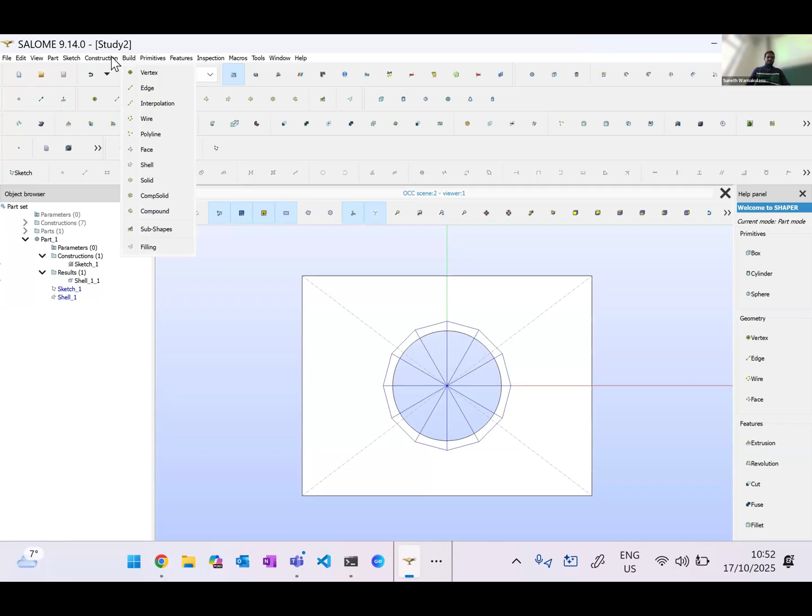So how do you export? Where do I have it? Yeah, in the features, export to geom. Click on it. So we export this shaper to geometry. Now you don't see anything happening, but fine. Now switch to geometry in here because these are the steps in meshing and the model creation. Now you are in the geometry mode. So you see automatically the shell is there, which came from the shaper.

You can skip the shaper step if you like. If you are in the geometry mode, you always need to work with XYZ coordinates. So if you want to create the same shape, I will show you how also after this example. Then you need to use, like GID, XYZ coordinates, create the lines, create the surfaces, then cut it out, all of these things. That's the difference. It's up to you how you do it, however you feel.

Okay, give me a second, this goes up. Can we just put it somewhere else? Because it's blocking the whole. Maybe you can force it to hide. Hide. Yeah, nice. Thanks. It's fully hidden.

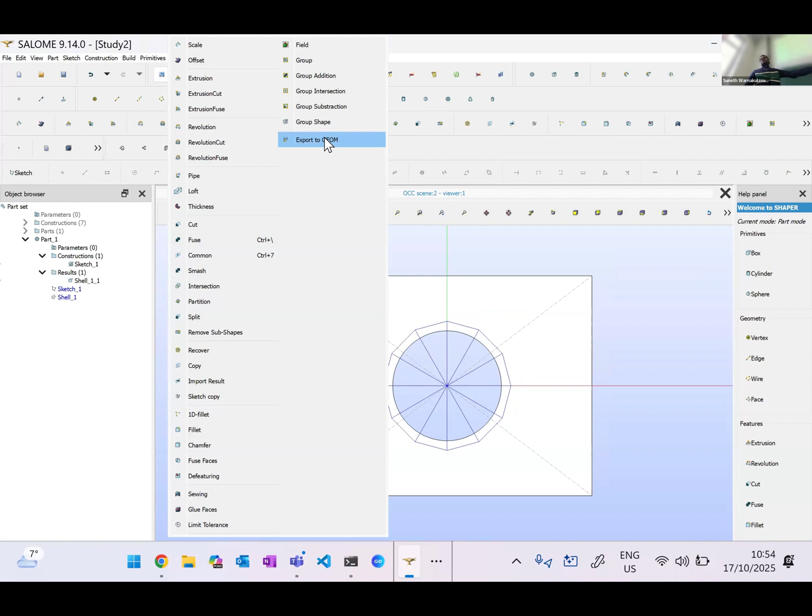So what you have to do is go to shaper, then go to features and then export to geometry. Then it exports this shaper step to geometry so that we can work on it. You don't need the shaper step, as I told you. You can fully start with the geometry. Then you are working with lines, edges, faces, not with parametric modeling with these relationships.

So we go to geometry. Now you have the shell. Now we need some boundaries defined so that we can apply our boundary conditions, as in GID. Same steps, nothing new. But how do you do that? You can right click on the shell, create group.

Then you have to select which type: node, line, surface, or volume. In this case, first I will create the solid, so I will click on surface. Then you just give a name. I will give the same name, solid.

There are multiple ways to get the areas. What I usually do is select all, since it's only one surface. If you have multiple surfaces, select all will select all of them, and you can click on each to see which one corresponds. Then you apply. Don't use apply and close, because we need to keep applying boundary conditions, so we only apply. Done. So you see here, solid is there.

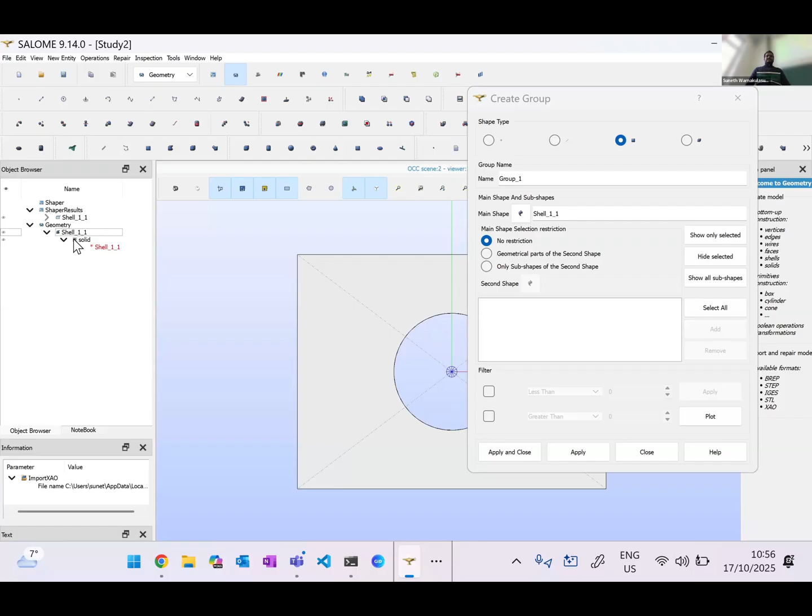You see it's using shell something, the origin is from shell. Now we will create the left edge, which we had in GID, so it's a line. You switch to this one, the line one.

Then 9 is this line, you see it disappears. The numbering might be different in your case. And 11 is the bottom. 13 is... I don't know which one. 13 is a circle, yeah, 13 is circle. So then 4 should be the left line.

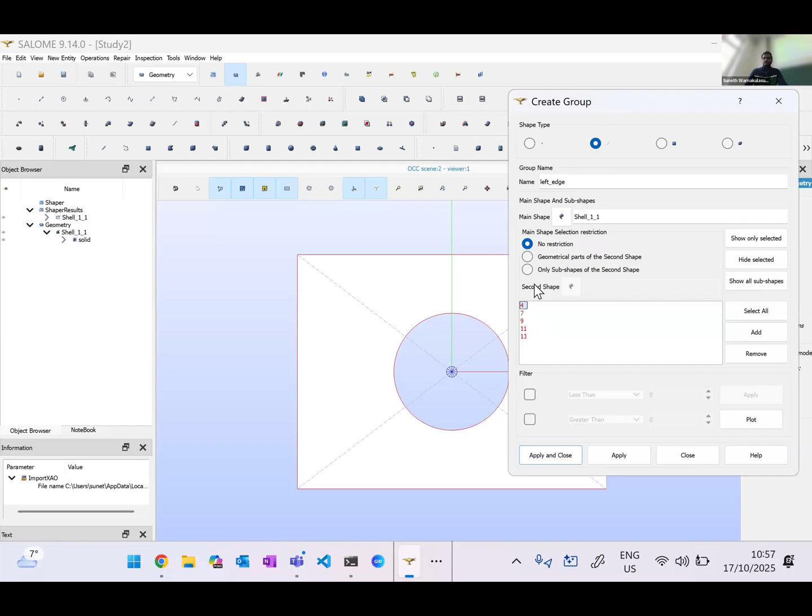Like this, yeah, this is one way. So I will show you the other way now. I will close this selecting. You can go to here, shell, and there should be something called... okay, where is that? Yeah, explode, that's what I was looking for. So in the new entity, explode.

What explode does is it creates a group name for every subtype. The problem with this is if you have really complicated geometry, it might create 30 different group names. Like I can do it here: you say shell, and sub shape types, I need edges. I need to explode all the edges and have separate names for them, that's what I'm saying here.

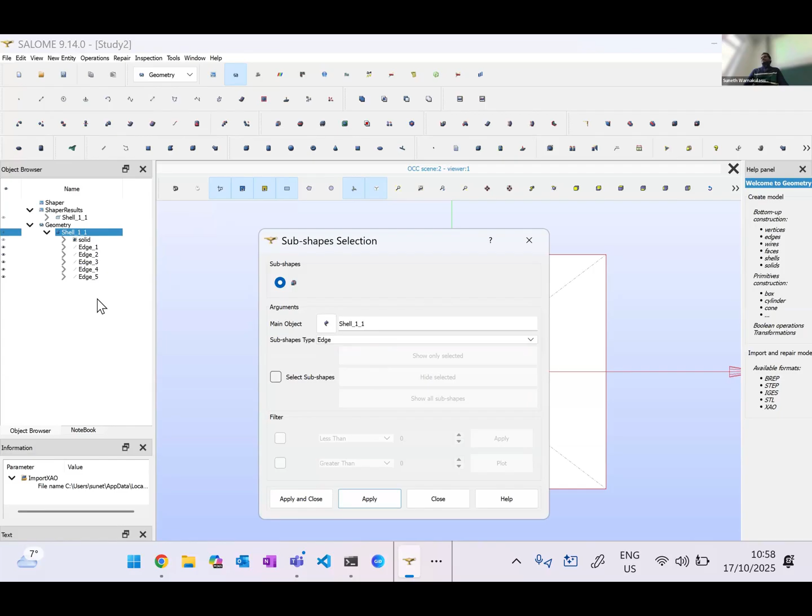Then you say apply, and you see 5 edges are coming. Now you can also see which edge is which one. So you select this, and you see some things disappear. Like this, so you can delete whatever you don't want. Now that's another way. So there's no one way in Salome.

There's multiple ways to do the same thing, even this same simple model. So let's see what we need. We need this, so I will just rename this to be left edge. You can do it like that also. Left edge. And then this one is bottom, we don't need, so we delete it. Then this one is circle, I think, right?

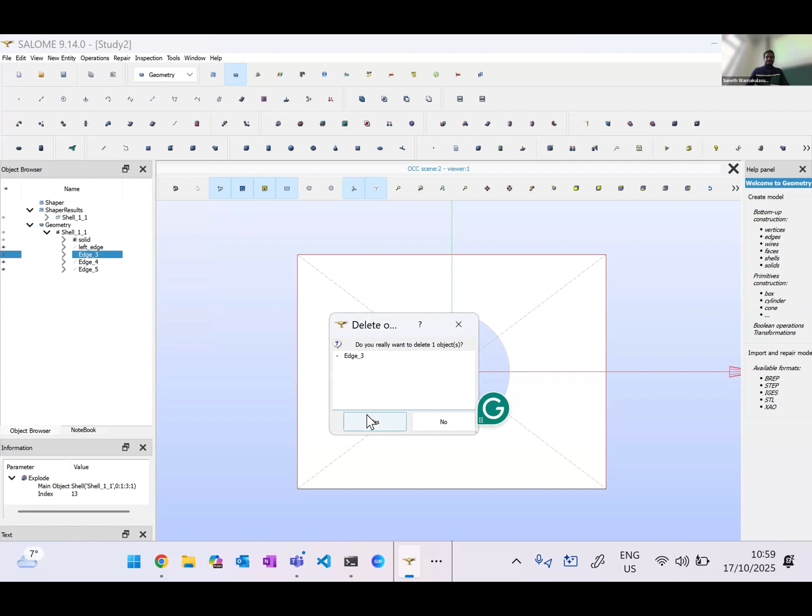Yeah, circle we don't need, we delete it. This one is, we need that, that's the load top, so we rename it to load. This is the right edge, so we rename it to right edge. So this is the other way of doing it. Like that, so you save, fine.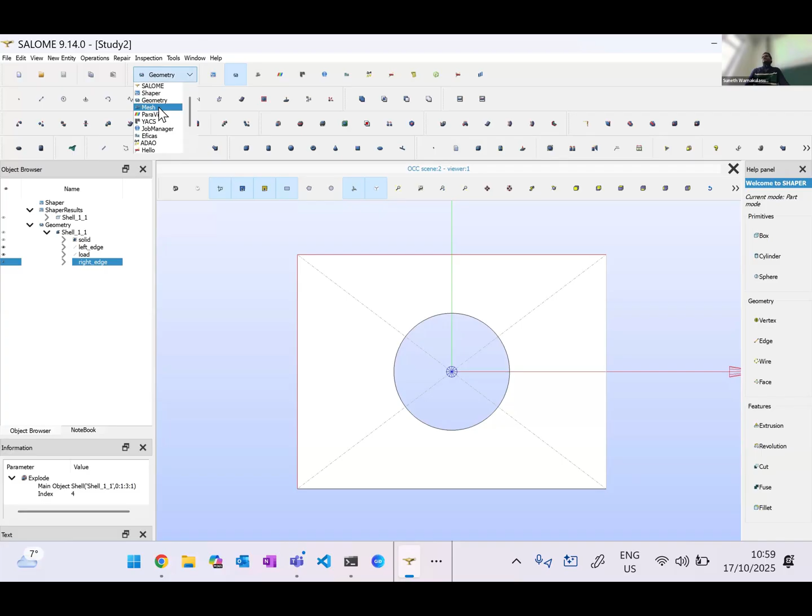So now you have created the domains, basically. The next step is creating the mesh. Because now domains are identified, the boundary conditions are identified, now we have to look at the mesh. For that, we need to go to the next step, which is the mesh. Click on it.

You get something like blank in here, it's black. I don't think I can change the color of that, yeah, it's black by default. So you have nothing here. First thing you have to do is select this shell one and go to mesh and create the mesh.

In here you get options. Since this is a 2D one, that's why 3D is disabled. You can give options for 2D, 1D separately, because it's asking how you want to mesh, since Salome can do multiple meshes at the same time, and you can combine them afterwards. That's advanced meshing, you can look at Google videos, YouTube videos for that.

Because you can generate a mesh for 1D here and 2D here separately and then combine them at a later point. Those kinds of advanced things you can do in Salome. I'm not going for that, so we will do only 2D. Here you have to select which type of mesh you want to have. NetGen 1D, 2D free faces means actually triangular ones, unstructured ones. You can have structured ones also.

This one you cannot really do structured meshing. You need to break it down to some other component to do structure. This hole with plate, even though it's super simple, to structure this you need more involved steps. So we will choose NetGen 1D, 2D, because we need to mesh 1D as well as 2D in this same mesh. We are not going to do it separately, so that is easier for us. It's not a must always.

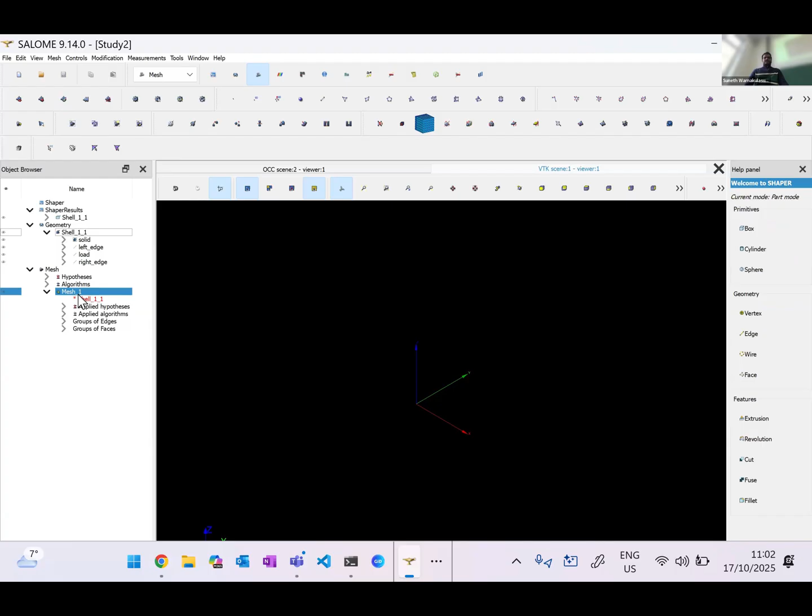So I will save it again. If you want to see the domain mesh, right click, compute. Yeah, you see domain mesh. So you see the summary, faces, edges, and everything. So you see the mesh now.

Yeah, but there's a problem. This will create a domain mesh, but it will not create submeshes for the boundaries, because for FEM we have domain mesh for sure, we need that one. And we need to know the nodes and the connectivities of this line to apply the load. If you don't tell it to Salome, it will not create that by default. So how do you do that?

You right click on this mesh one, say create a submesh. Now the main mesh is mesh one. And then the geometry, it's asking for the submesh geometry. So you can select, basically we need the left edge from the geometry.

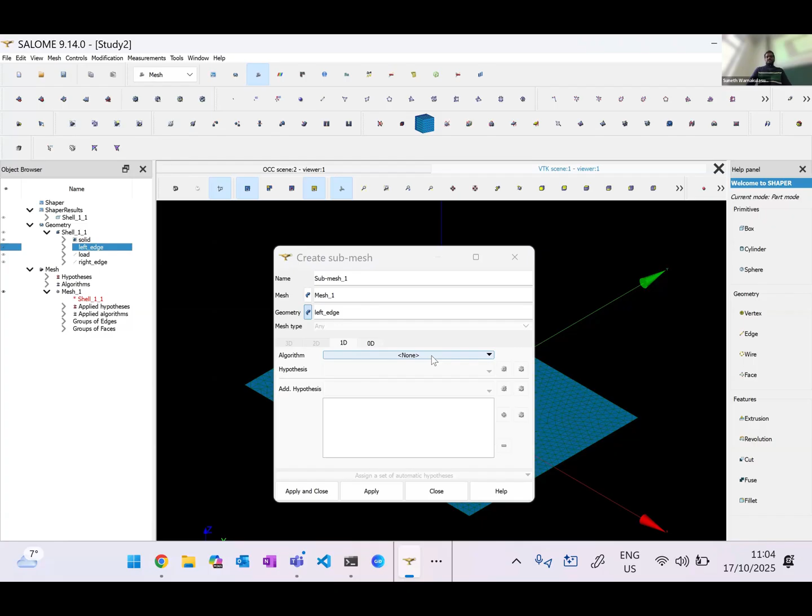Now it asks for the parameters. You can give separate parameters for that. So the type is wire, that's the basic one because it's lines. It's only 1D, here you see it's automatically 1D only. You select wire discretization.

And then again it has a hypothesis, that means the parameters to define the wire. So you can click on this and say either number of segments or local length, up to you, it's just a parameter. I just say local length, and I just say here 0.1 maybe, it's up to you.

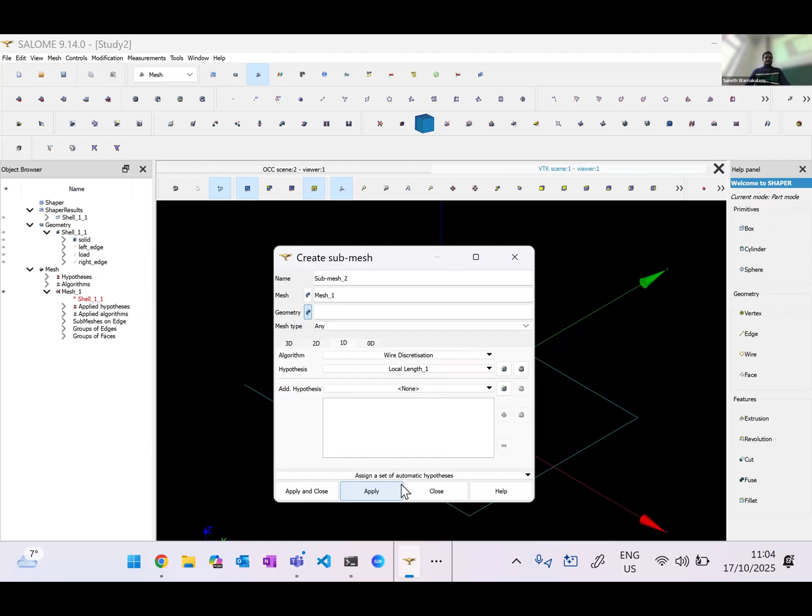Okay, so you see its local length, for the left edge. Apply. Now I'm not closing because I need to keep on doing it multiple times. So I apply. So it should have created submeshes here, edge. Yeah, it created here submesh.

Now I will apply the same for the right edge. So here you have to click on this if it is not activated. Then click on the right edge. It's selected, so I will use the same length. If you want to use a different length, you can again create a new local length. So then it will be a new local length here, it will not override the other one.

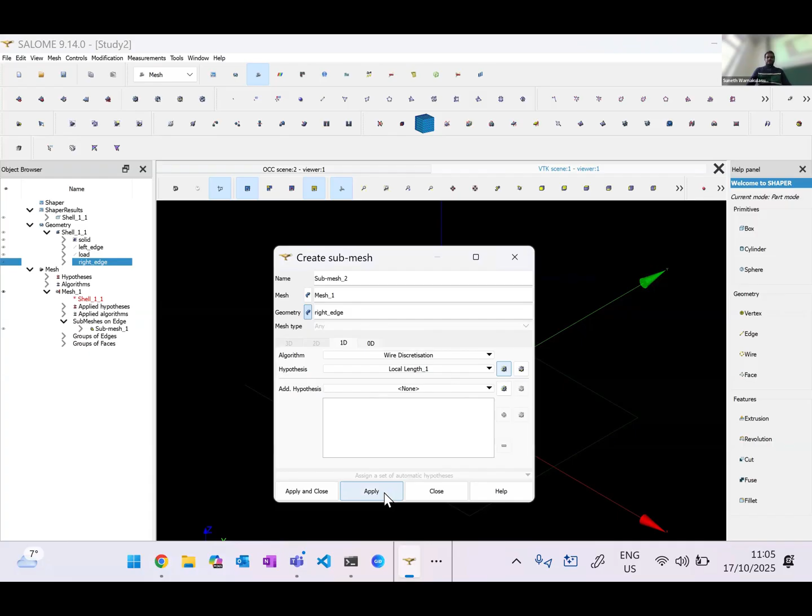It will keep on creating these kind of hypotheses as long as you want. Since I don't want it, I will just use the same local length. Apply. Again the same for the load, because we need that also for the boundary condition. I will use the same local length. Now I will just apply and close.

So you can double check here: load, left edge, right edge, load. So you have this. You can rename these submeshes also to be perfectly nice, but no one will read them. Actually Kratos will not read them. Kratos only will read these names: solid, left edge, load, right edge. Not the mesh names, even though mesh names will be there in the final outcome of the Salome.

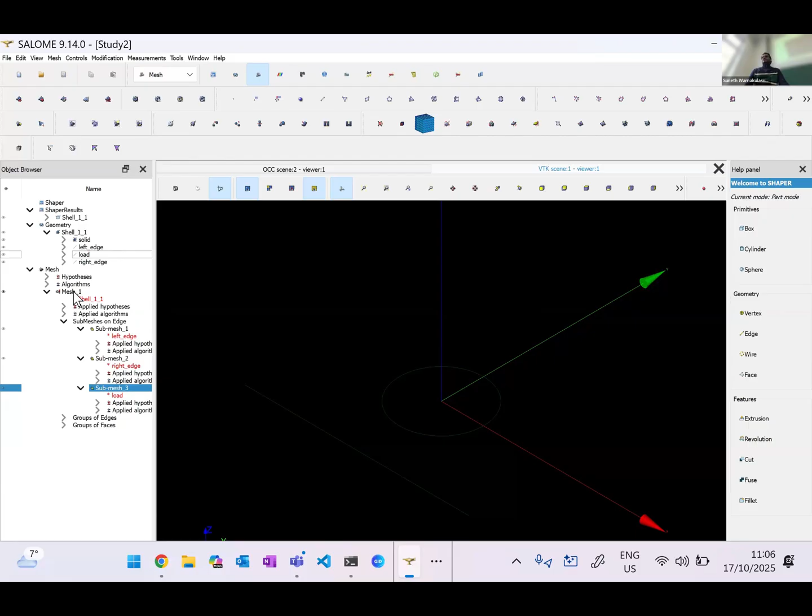Since you created now submeshes, okay, save it. You need to again recompute the mesh so that it will calculate the node and connectivities of the submesh. So you can right click, clear and compute. So it clears the existing one and computes the new mesh. It should not change anything here, no, it will change because I gave the sizing differently. Earlier I didn't give any sizing for the edges, now I give sizing for the edges, so it will be for sure different.

Now you see the edges are a little bit more refined because we gave specific sizing, and now we have separate groups for them also in the mesh. So now the part of the Salome is done, and we have the mesh, groups, domains, everything which we need for Kratos.

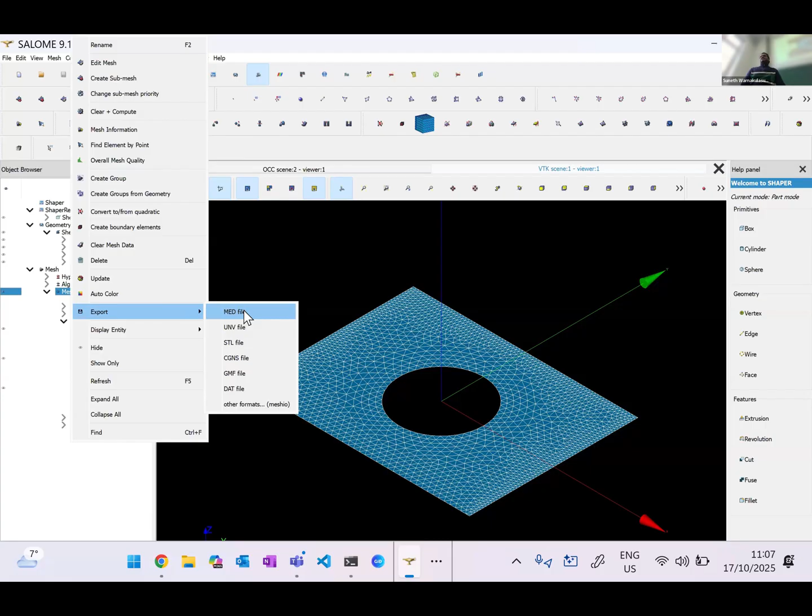Now we just right click on the mesh and go to export and med. Med means mesh data file, basically it's a short form for mesh data files. Save it somewhere you can access. This magnifying thing is killing my whole interface, I can't see anything. Okay, I will just do the desktop. Where's my desktop? I will create a Salome Sampos folder.

So either you can do here mesh one, the main mesh, right click and export, or you can go to file export, both are the same. MED, that Kratos can read directly. That's why Salome and Kratos are coupled in a loose way. MED is like a standard format, so Kratos can read it nicely.

Now I just want to show you some things.

This file is fully binary, so you cannot open it unless you have HDF5 viewers. It's an HDF5 file, I don't know whether you know what HDF5 is. It's a high definition file, I think HDF means. That means it can store a lot of big data really in a compressed manner, tensors, matrices, high order tensors like fourth order tensors, no problem. So it uses the same format, even though it's MED.

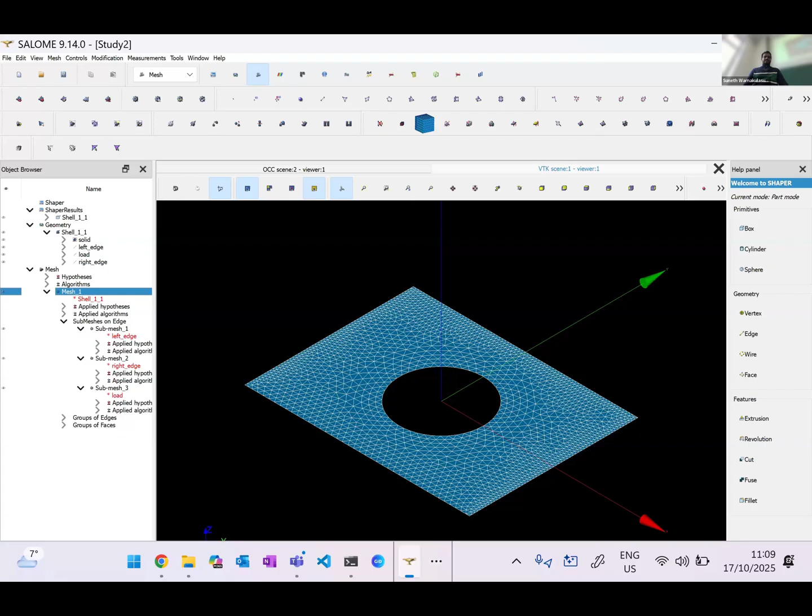Okay, fine, now the Salome part is done, let's close Salome. Okay, yes, save, sure, yes. Now you have the mesh one med file. Where is my study file? I don't know where I saved it.

Okay, as I told you, this is a geometry file. Now, how do we construct the main Kratos and the JSON files? Because those are the ones which are required. Geometry file, we now have a med. Instead of MDPA, earlier we had an MDPA file here. You see, MDPA is a mesh file which has node information, human readable. Now we have it in a different format, it's called med. So geometry is done.

Now we need to have the JSON and the main Kratos. How you can do it, I would say, is not the easiest. What you can do is go to Kratos Multiphysics, one way, not the only way, go to examples and find the closest example which makes sense, copy paste the JSON files, change them. That's what we always do, that's one way.

Another way is download GID, the free version, create a really coarse mesh with whatever boundaries you want. Even if it's a complicated component, create it with simple boundaries, we don't care. In GID you don't need to model the completed component as it is, it just needs to represent the same boundaries and you can create maybe a 10 element case, who cares, because then you generate the JSON files. You use those JSON files because you can use the free version forever.

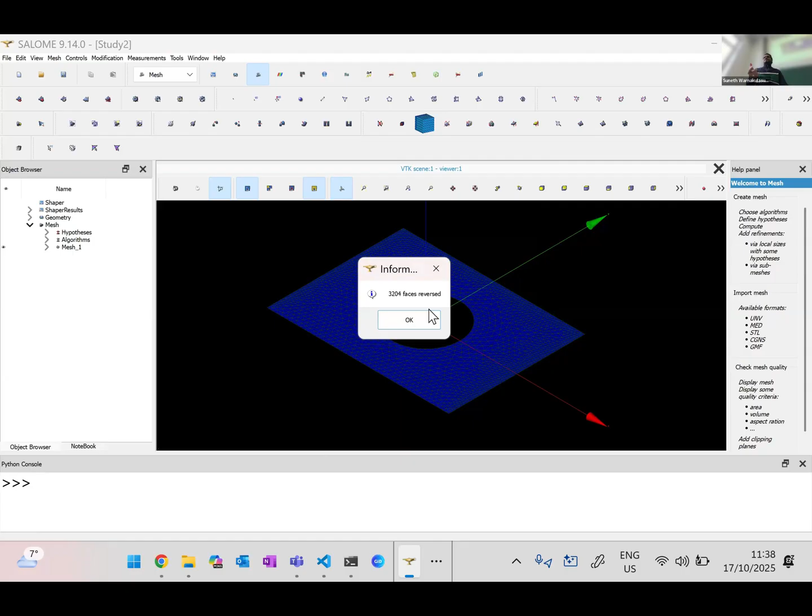So you reorient the faces basically. And apply and close. Now they reversed it. You just need to reverse it because there's only one way, one direction or the other direction. It doesn't matter if you put -1 in that one or the other one, because you just have to reverse it. That's it. Okay. Now you save and again export the mesh.

I will save it in the same location. Good question is where? Desktop. Salome, let me show. So I will overwrite it. Overwrite. Fine. Now it's done. Now let's see. So we get the same error again. No, it works now. Nicely. It ran.

Now let's go and try to do the open source pipeline visualization. For that, we will use Paraview. That always happens. Give me a second. I always have to reinstall Paraview for some reason. It always crashes in Windows. It doesn't take much time. I don't know why. I always reinstall Paraview in Windows.

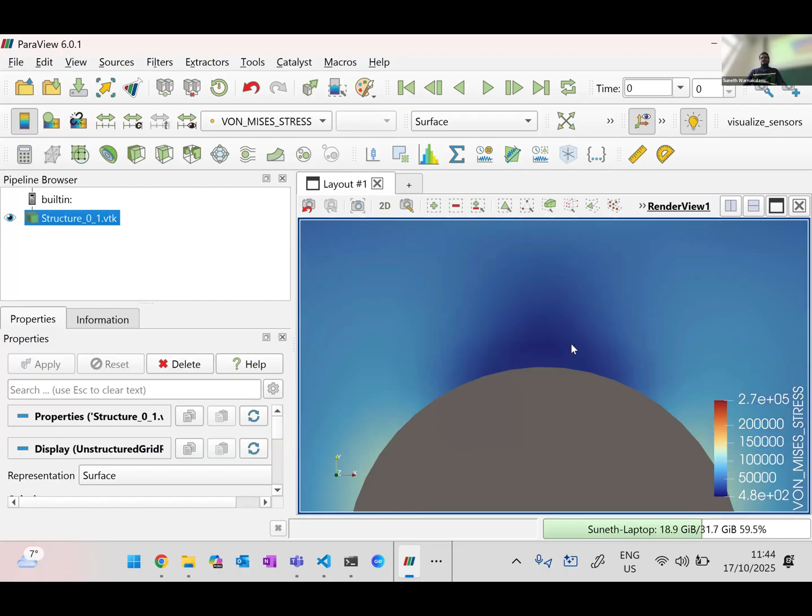You will see a more complicated list of variables when you do the final example of optimization, because there you will see a lot of variables for optimization. For the simple stuff, no. You have the reactions and one with the stresses. So that's how you can visualize. Since this is a fine mesh, you don't see the discretized values, because we use the fine mesh and GiD. Otherwise, if you go in, it should be discrete at one point here. You'll see something like that.

So with this, let me go to the presentation to see. Yeah, I didn't miss anything. With this, we conclude the session for the morning. It's actually 15 minutes earlier, so that's nice. Any questions up to now about anything? Okay, then we can meet at 1 o'clock after lunch.

The afternoon session will be nothing to do with Salome or GiD, it's just pure Python. Even the mesh will be generated by us manually by hand, so it will take some time. We will show you most of the functionalities of Kratos, how you do meshing, because you can do everything by hand as an academic exercise. That's the target of the afternoon, so that you know in detail how the Kratos backend works, because this is just clicking and running, even though I did some magic commands here. It feels like magic, I understand, but you will understand them in the afternoon. Okay, see you at 1 o'clock then.